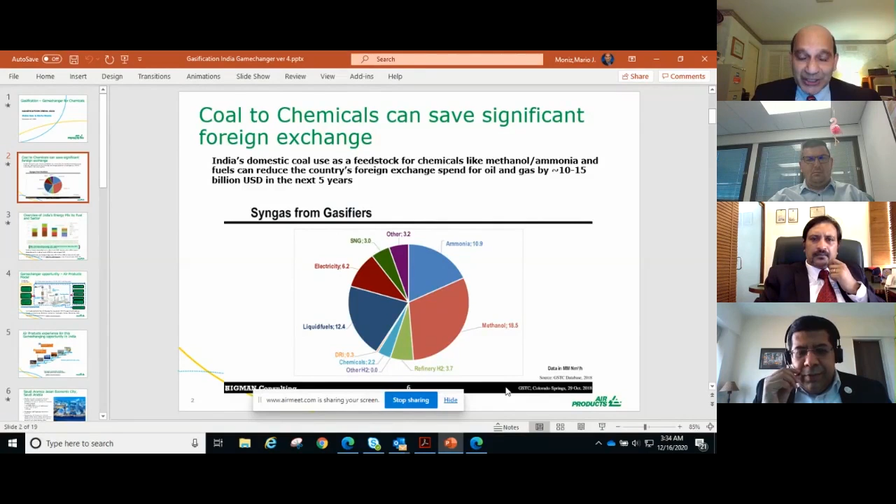Again, as we're talking, it's a game-changing opportunity for India, it's a significant opportunity. And just along the lines of what we just heard from our moderator, Anisha, the significant savings is the reduction of foreign exchange from the opportunity to use local indigenous coals from India, right?

So if we look at gasification, we take it in totality, and we look at gasification from across the world, what's been done over the past 3 decades of time. You're basically taking disadvantaged fuels, such as coal, such as maybe even petroleum resid, petroleum coke, and you have the opportunity to convert it to syngas, very clean, in a very environmentally acceptable manner.

And from the syngas, as you see on this pie chart, you can make a bunch of different chemicals, very basic chemicals like ammonia, methanol, and then onward from there, you can go on to fertilizers, olefins, fibers, petrochemicals, etc. So if you look at this pie chart, there's the potential for making a number of different chemicals in India that are today derived from oil and natural gas, which has very high imports.

And then there's also the possibility to make a different type of product slate - middle distillates, such as liquid fuels, that you see on the left-hand side of the pie chart, SNG, power, clean power. So whatever the demands may be for the local region of India.

So the opportunity, again, as Anisha mentioned, is to save foreign exchange in the range of about $10–15 billion, which is very possible in the next few years.

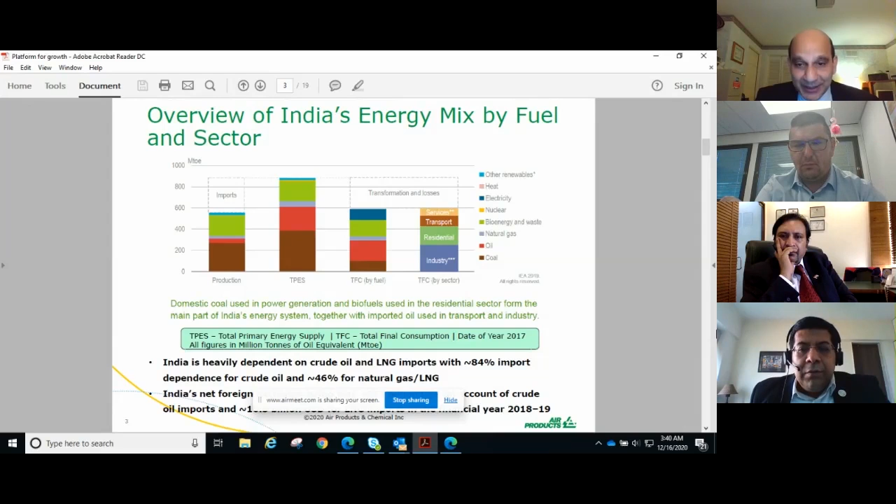So whether we look at this slide, which is both the fuel, or the prior slide where you can make basic chemicals and onwards to more advanced chemicals, that is this game-changing opportunity available to India through a very proven, well-understood, low-risk technology. So how can Air Products, how can the company that Shiba and I work for, work with you and your companies to bring this game-changing opportunity to your region and your part of the world?

So this is just a very summary slide. In fact, Shiba will cover the slide in more detail in a few minutes. So at this point, I just want to say a few words.

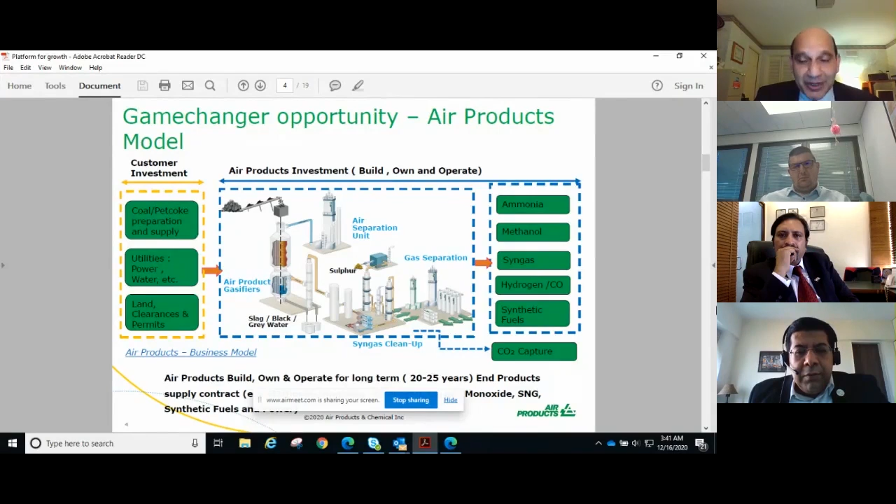So if this is the business model and this is what Air Products can bring to you, you may ask: what's your experience? What have you done in gasification? And why should I be working with you, right? It should be a very fair question. So let's speak about that right now.

So here's our short summary of the experience Air Products has had. Actually, in the past few years we've used gasification in our plants as a customer, as some of you might be or might be interested in. But only a few years ago, we actually started with acquisitions.

In 2018, we first acquired the Shell gasification technology—this is a dry feed technology, as some of you may know. And in that same year, we bought the GE gasification technology, which is very complementary to Shell; it's more a slurry-based technology for different types of coals and feedstocks. So between Shell and GE, it gives us a very broad span of taking in, honestly, any different type of coal, petroleum coke, or resid. It's a very broad range of feedstocks that we can handle.

And what these two technologies brought to Air Products is literally hundreds of gasifiers through their licensees, which are now owned by Air Products. That was a lot of experience, a lot of intellectual property, and a lot of people with this broad experience spanning about 30, 35 years of gasifiers up and running in all parts of the world.

And then we've taken this experience and we got very busy. As you can see, as we step up this ladder, we've done many build, own, and operate projects where Air Products, either on its own or through joint ventures, has invested several billion dollars. We'll go through all these different projects. As you see in the stepped ladder approach, there are 5 different projects here. In the next 5 slides, I'd like to cover these 5 different projects, and then I'll turn it over to Shiba, who will do a deeper dive on build, own, and operate.

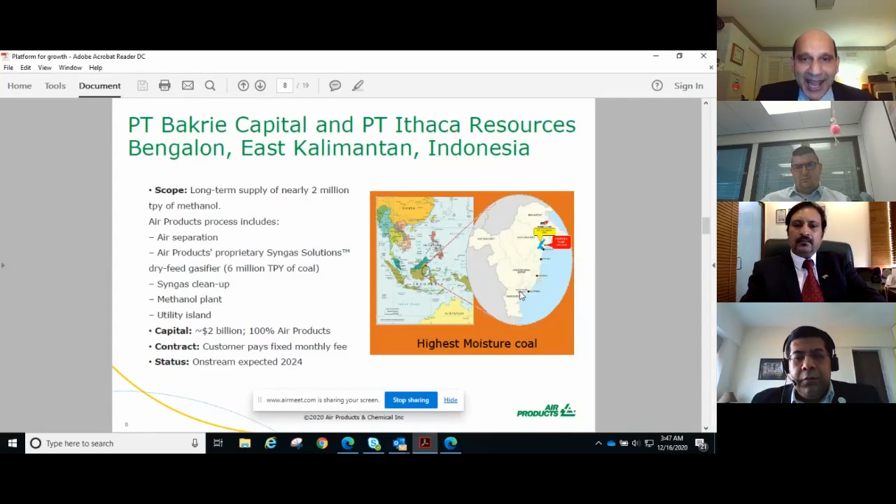Construction is going very well. We expect to be up and running within the next 2 years.

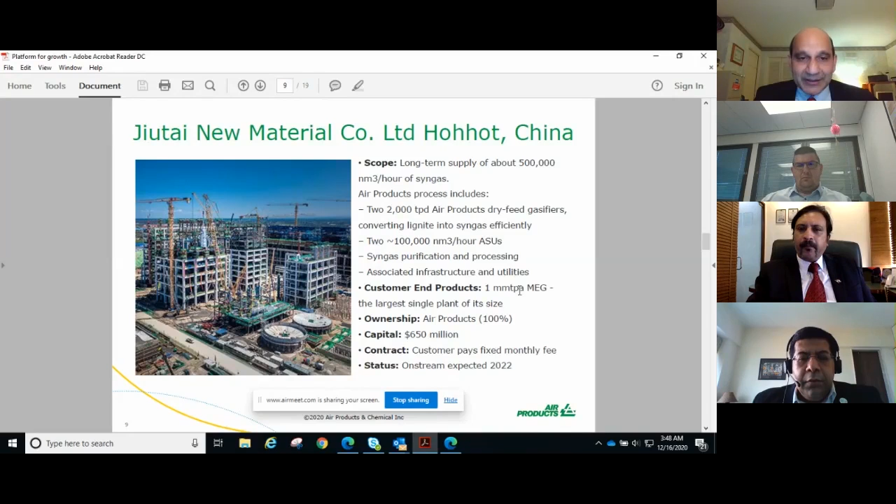And last, before I turn it over to Shiba, who will talk to you a little bit about a couple of India projects, I just want to share with you one more, smaller project. The size range we work with goes from very small to very large.

So I just want to give you a flavor. Remember the pie chart? Gasification is very versatile. The pie chart we showed earlier can be taken to many different types of chemicals, methanol, ammonia, and onwards, also distillates and IGCC such as power. Those were some of the examples I shared with you.

So now I'd like to turn it to Shiba. I'll move to the next slide, and Shiba will take you through a couple of projects in India and then a deeper dive into our build, own, and operate model.

Thank you, Mario, for a very nice presentation, and for passing on to me for the next couple of slides. Good afternoon to all of you present here. I will first take you through some of the projects we are currently executing and will perhaps be executing in the near future, which are very large gasification projects coming up in India.

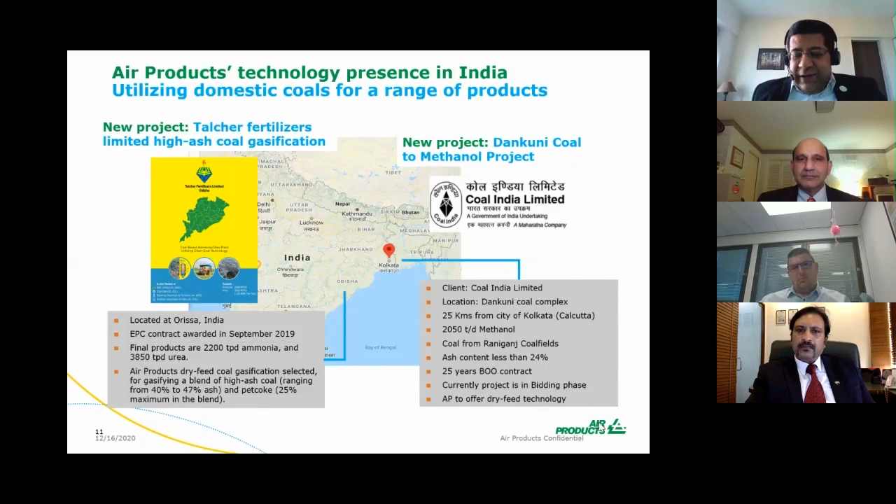Okay, so I'll just keep that.

Coming to a very important aspect, as Mario mentioned earlier, the contracting philosophy in India in the past had been conventional EPC, where the customer or client used to select the technology licensor, and they would then either implement the project themselves or select an EPC contractor to build the plant. We typically call this a sale of equipment model, or SOE.

In that case, the customer is investing in the entire capital expenditure, and the customer is taking all the risk in terms of technology risk, construction risk, and operations and maintenance risk throughout the lifetime of the project.

Now, what happens in the build and operate model is companies like Air Products are in a position to finance these multi-billion-dollar projects in India and elsewhere in the world, as Mario has explained in some of those examples, where we bring our own capital and our own in-house technology, build the plant in a certain time frame, then commission, own and operate the plant, and enter into a long-term agreement with the customer for product offtake. The product could be syngas, or it could be other chemicals like methanol or ammonia, or other products, as Mario explained in the pie chart.

So this is what we call the BOO supplier or BOO operator — Air Products will be providing the entire capital to design and build the plant, and then we will own and operate the plant for a long term, typically 20 to 25 years, and enter into a long-term agreement for product offtake.

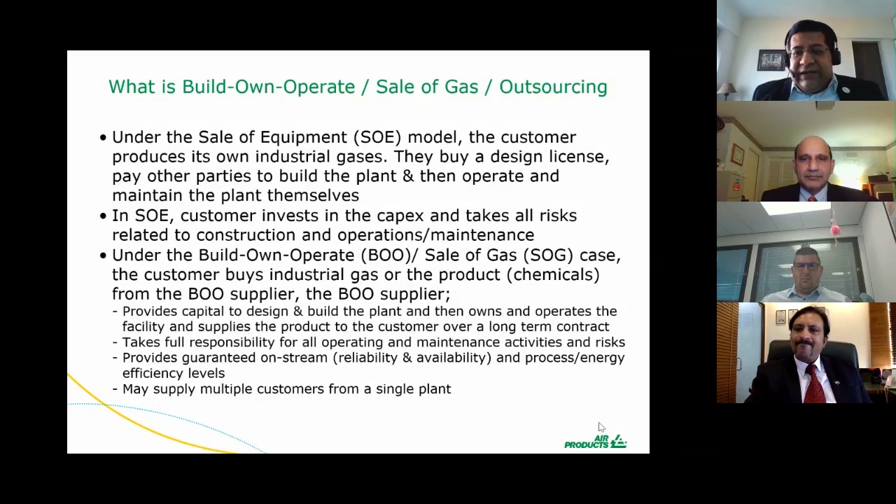We may also be able to supply multiple customers from a single plant, so economies of scale come into the picture. In a cluster situation with multiple customers, we build a bigger scale plant and supply two or three customers from it, enhancing the economies of scale.

This particular slide Mario has already explained to some extent, but I wanted to do a deeper dive into how we offer this build-own-operate, or as we call it, sale of gas model, to our customers worldwide, and what benefits it brings to the end user or customer.

As Mario already explained, there are multiple opportunities in terms of products we can look at, like ammonia, methanol, syngas, hydrogen and carbon monoxide, and also synthetic fuels like CTL — coal to liquid — or even SNG, synthetic natural gas.

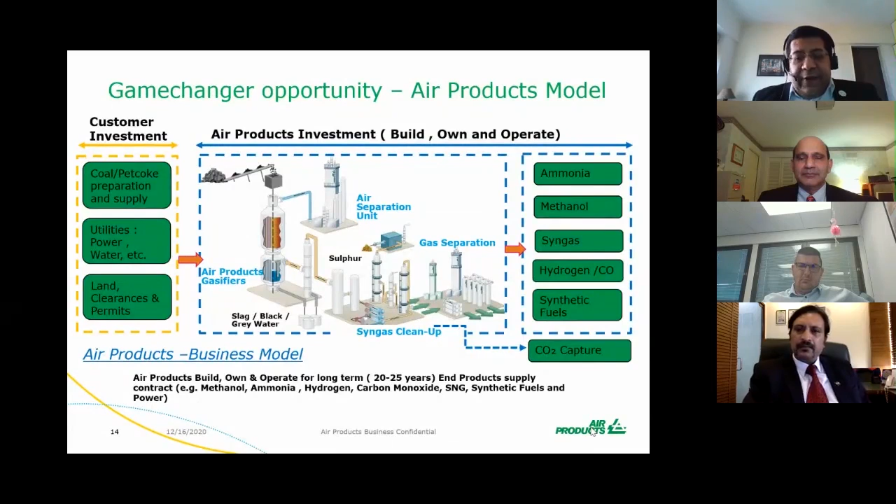Here, the business model is Air Products will build, own, and operate for a long term, 20-25 years, and the end products will be supplied to the end customer based on certain long-term guarantees, as I've mentioned. Coming to the next slide, this is a very simple slide, but I want to explain how the risk matrix changes.

And even the costs could also vary in terms of implementation cost, typically by the end of the project there could be cost escalations because of various reasons.

So what we do is we take over all that risk from the customer or the end user, and we bring in the capital, we build the plant and own and operate it, and we give all kinds of long-term efficiency and availability guarantees. We also give a very predictable cost structure, in the sense that when we sign the agreement upfront with the customer, the cost structure is already known, how much customer has to pay every month in terms of a conversion charge.

So there is no surprise at the end of the day that the cost would go up for the customer. It's a very predictable cost structure for the entire 25 year period.

At the same time, we also guarantee the startup date, that is the project schedule. We will have to ensure that the project is done on time, commissioned, and started up on time. Otherwise, there will be penalties also in the contract if we are not able to reach those guarantees.

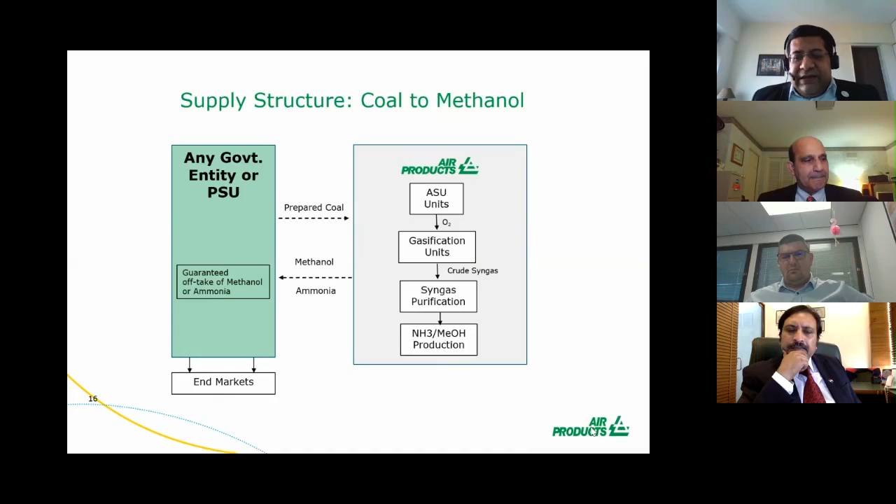What we need is prepared coal or pet coke as a feedstock. And only one thing is very important: the customer has to take care of the end market, which means they will have to take care of the final marketing of the product. We are basically giving a long-term guarantee as a BOO operator, including the investment part.

So what are the benefits of the BOO model, as we say in India, build, own, operate? Air Products will invest, own and operate, and we will guarantee the plant performance backed by significant financial incentives, as I've mentioned. There will be even penalties if we are not able to achieve those targets in the contract.

So there will be complete capital avoidance by the customer or client, which means Air Products will invest the capital. It's a $2 billion project. The entire $2 billion Air Products is going to bring.

And we will guarantee the availability, that is the percentage on-stream factor. We will guarantee the reliability of the plant efficiency in terms of the energy efficiency, that is the specific consumptions. We will also guarantee the product specification, the operational cost, and also guarantee the build schedule and the cost of putting up the plant, which is basically the construction cost and the schedule cost.

So these are the benefits of the build and operate model, and this is a game changer, as we are saying, in terms of accelerating the process of putting up more coal gasification projects. Because what is happening is customers may be hesitating about whether this technology would work, whether they'll be able to generate that much fund, whether there is an inherent risk in the project, or even whether the project is viable or not. So there are several questions that come up and typically delay the whole decision making process. So here we can swiftly move in as a BOO operator.

We can take away all those risks and give long-term guarantees, operating these plants smoothly over time. Mario has already shown how we are operating the Luan plant, which has been running for the last 3 years, already achieving full capacity and a very high availability factor. We've demonstrated worldwide our capability in operational excellence, in bringing in the capex of multi-billion-dollar projects, and our own strength as a licensor with engineering capability to build such complex gasification projects.

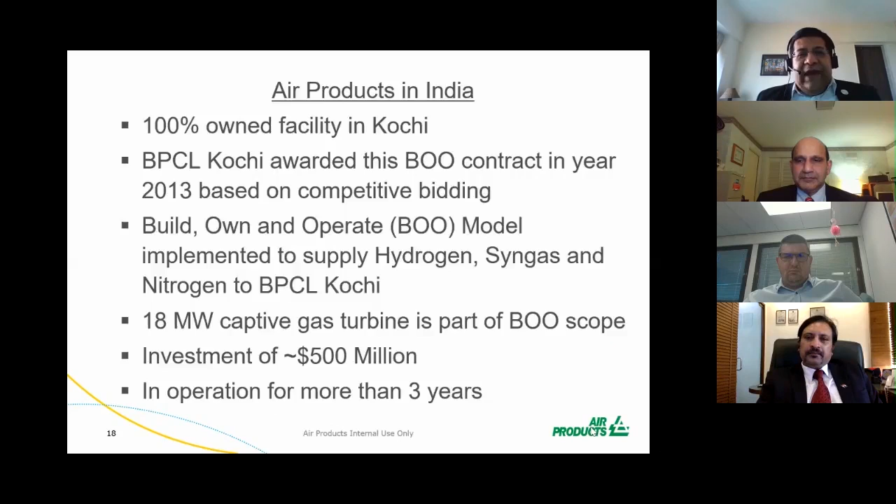We have a very large build and operate facility in Kochi. You can see the photograph here. This was a long-term 15-year agreement, build and operate, signed with BPCL for supply of hydrogen, nitrogen, and syngas. We also operate a captive power plant, a gas turbine, as part of this BOO facility. About $500 million worth of investment has been made by Air Products, and we are on a 24/7 basis supplying hydrogen, nitrogen, oxygen, and other products. We will also soon be starting up our syngas plant, which will supply syngas to the oxo alcohol and acrylate project, the downstream petrochemical unit of BPCL Kochi.

So that was my presentation on our overall offering. As Mario has already explained, our international strengths in terms of what we are doing globally, I've tried to give you a flavor of what our business model is all about. Our BPCL investment is very large and already operational. You are all welcome to see the BPCL plant anytime—you can approach us and we can take you there to see how it's working. Thank you very much for this opportunity.

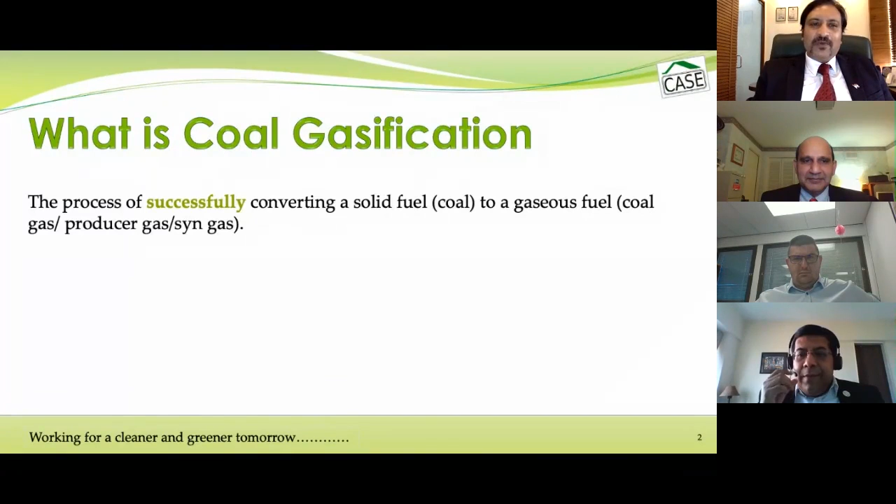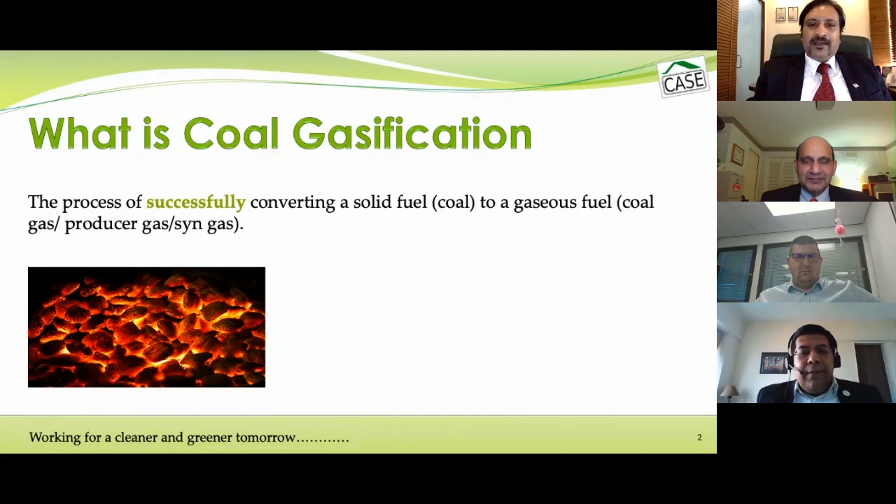Okay, wonderful. So I have a couple of notes I would like to go through. Firstly, we would like to talk about what coal gasification is. In basic terms, we define it as the process of successfully converting a solid fuel, in this case coal, into a gaseous fuel, which could be coal gas, producer gas, or syngas. It sounds very simple, but a lot of technology goes into it.

What are the various gasification technologies available today? Coal gasification has a huge history, and as of now, the following technologies are prevalent in the industry: fixed bed coal gasification, circulating fluidized bed coal gasification, entrained flow gasification, and finally UCG coal gasification, which was talked about in the first session. There was always one gentleman from Ergo who used to present on this, Dr. Blinderman—I remember him. Unfortunately he is not available today to discuss this, so I think someone will take this up in the future.

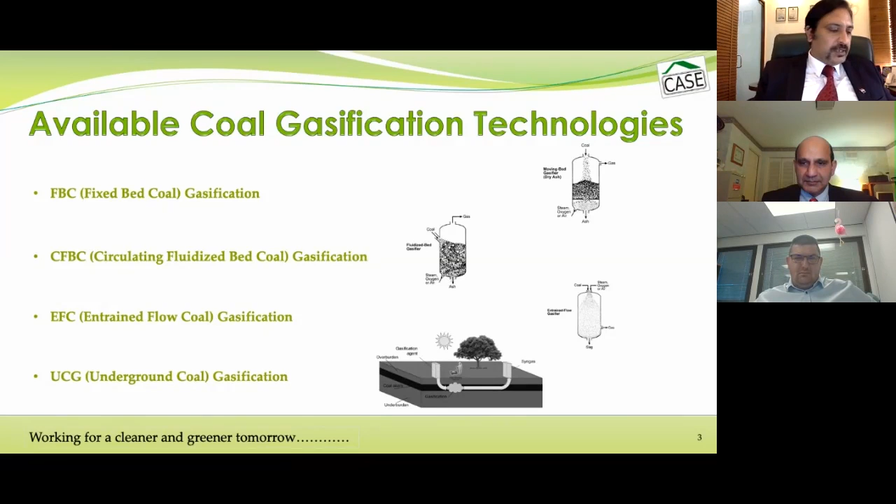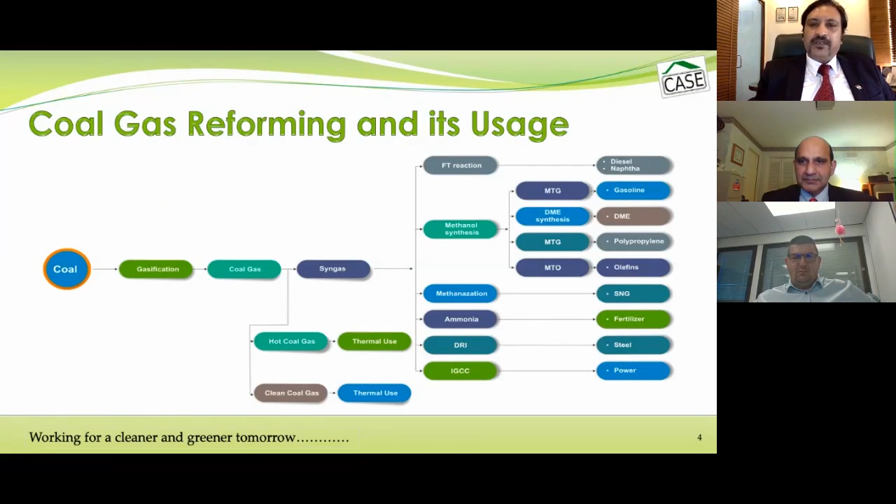Once the gas has been formed, it can be used in a number of ways. This is a value chain: coal is converted to gas through the gasification process, and there are two primary uses of this gas. One is the thermal usage, and the other is to convert it into syngas for different applications like liquid oils, synthetic natural gas, fertilizers, steel, power, etc.

Where do we pitch in this value chain? We as gasifier people basically play with the coal gas and use it as the heating or thermal use of this gas. So I would like to explain the technologies which we are using here for this.

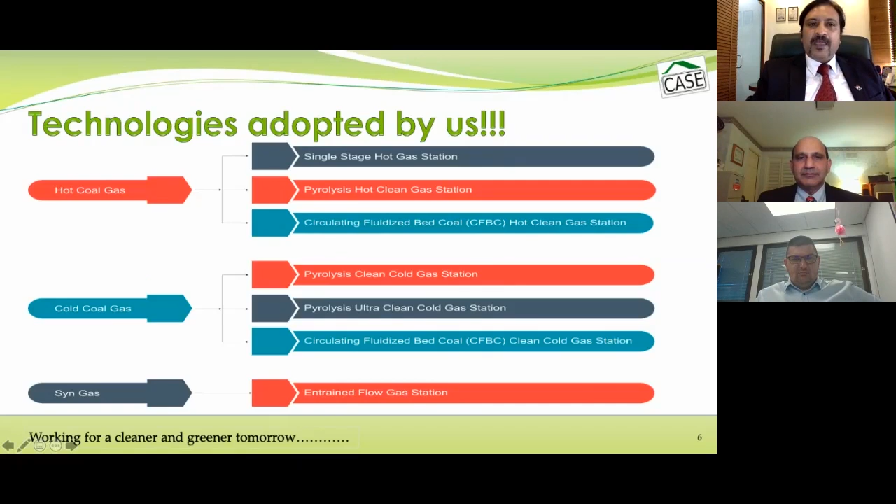Depending on the physical properties of gas, and more importantly, the gas temperature at the gasifier exit, we have categorized our technologies accordingly. First is hot coal gas, with variants like the single stage hot gas station, the pyrolysis hot gas clean gas station, and the circulating fluidized bed hot clean gas station. In the category of cold coal gas, we have the pyrolysis clean cold gas station, the pyrolysis ultra clean cold gas station, and the circulating fluidized bed clean cold gas station.

As for syngas, we have recently tied up with KEDA, who are the pioneers of this gasification technology in China. So we are doing entrained flow gasifiers with them for this.

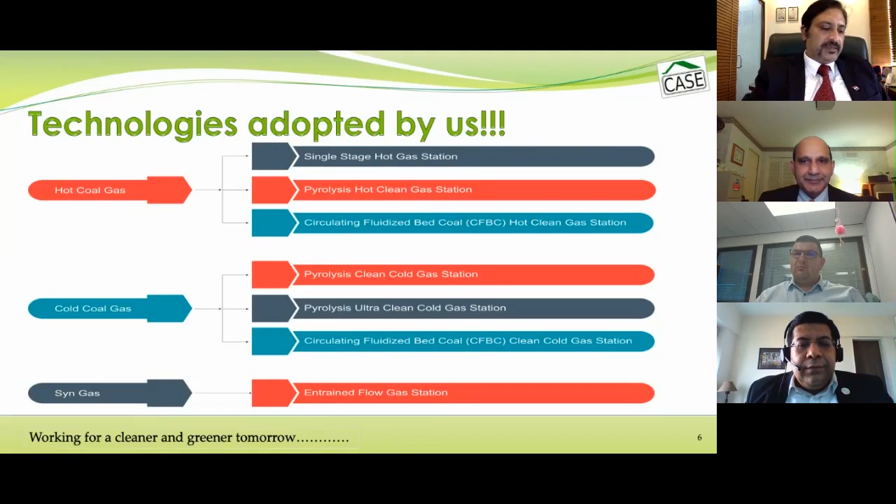My next important section for gasification is that whenever we talk about coal or gasification, there is always doubt in the mind about whether this technology is clean, whether it will be okay for the environment, what issues can happen because of gasification, and how harmful it would be. So I've categorized all these into four basic categories related to air, water, noise, and ground.

For air-related issues, we would say dust content in gas results in higher SPM and RSPM levels, sulfur content accounts for higher SOx levels, higher N2 content results in higher NOx levels, and there's the poisonous nature of CO, the main constituent of gas, which can be fatal. Then whenever using coal, there's generation of coal dust, and the smell or odor of gas is also a main concern. These are the air-related concerns picked up by environmental authorities in India.

Second is water-related issues. With gasification, there's always generation of tar and light tar oils. Phenol and condensate water is also a byproduct. Then cooling tower blowdown - whenever using a coal gas system, you need a cooling tower where water evaporates, and you need to blow down water to maintain TDS levels. And then you have water seals - a number of them in coal gasification systems which need replenishment and overflow at times. So what do we do with that?

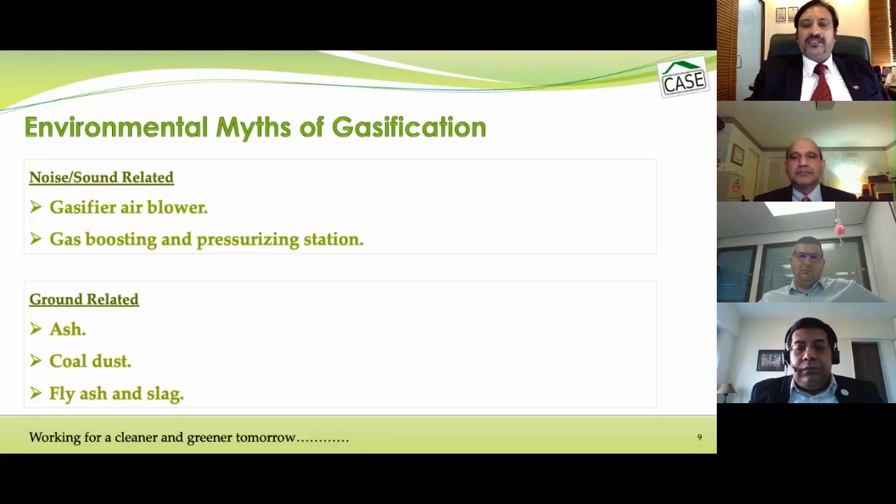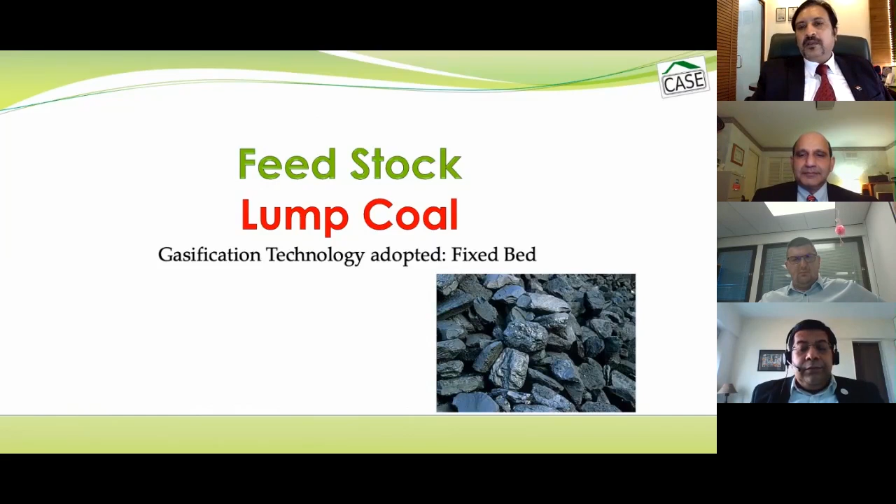So our technology is primarily divided into two parts depending on the feedstock. The first variant of our gasifier, in which we use sized coal, would be the single stage hot gas station.

This is a very simple design gasifier in which coal is fed from the top. The air and steam, which are the gasifying agents, are injected from the bottom. The gas is generated, passed through a water seal, and then through cyclone separators, and then taken for utility. The best thing about this gasifier is that the gas outlet temperatures are more than 450 degrees.

Because of this factor, we have played with the physical properties of tar and of water. We know that below 350 degrees, tar starts condensing into liquid, and below 80 degrees, it starts solidifying.

We all know that water always stays in moisture or vapor state above 100 degrees. In this technology, we take gas at 450 degrees, making sure all the tar and volatiles stay in gaseous form. The condensate water or phenols remain in vapor state and crack into carbon dioxide and H2O at the point of utility, which is the burner or point of usage. These are fully sealed designs, eliminating any chance of gas dispersion into the atmosphere, so there is no gas leakage in this kind of system.

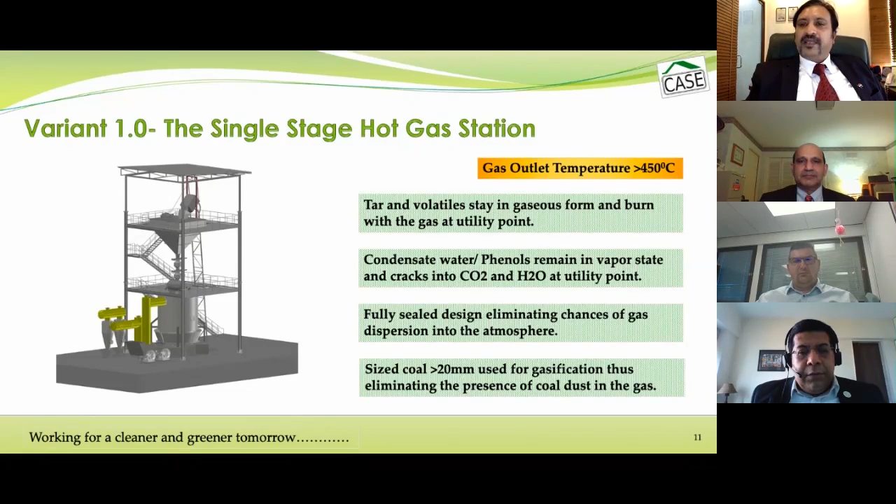So this is a simple process design. This is the gasifier, with the air blower, and then the gas is generated. Air and steam are injected from the bottom. It passes through a water seal, which is basically an isolator too. When you want to cut off the gasifier from the main system, you raise the water levels, and then the gasifier is isolated from the utility point.

There is a small cyclone dust separator here, which takes care of the heavy dust content in the gas.

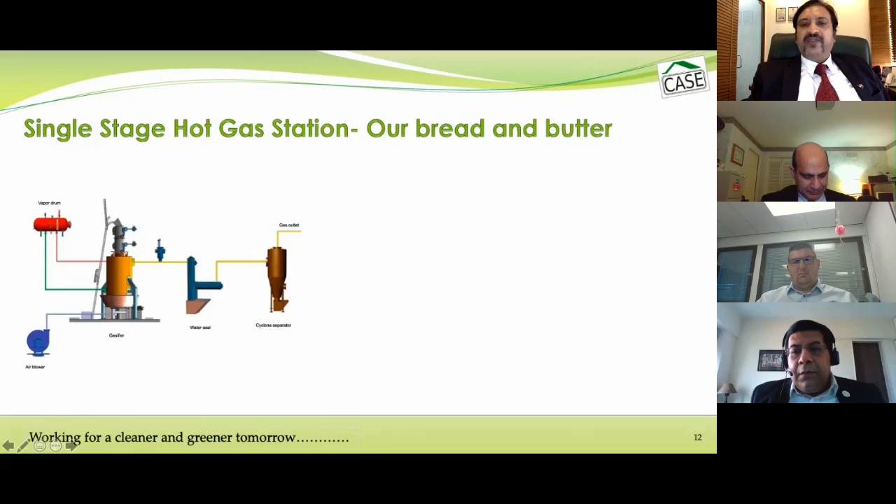One of the best features of this gasifier is that it has the highest gas calorific values, which can touch up to 1800 kcal per nm cube. This is because it's a combination of the calorific values of coal gas, the volatiles present, and also the gas sensible heat we are generating. The gas temperature is around 450 degrees, so we get the sensible heat of the gas at the utility point.

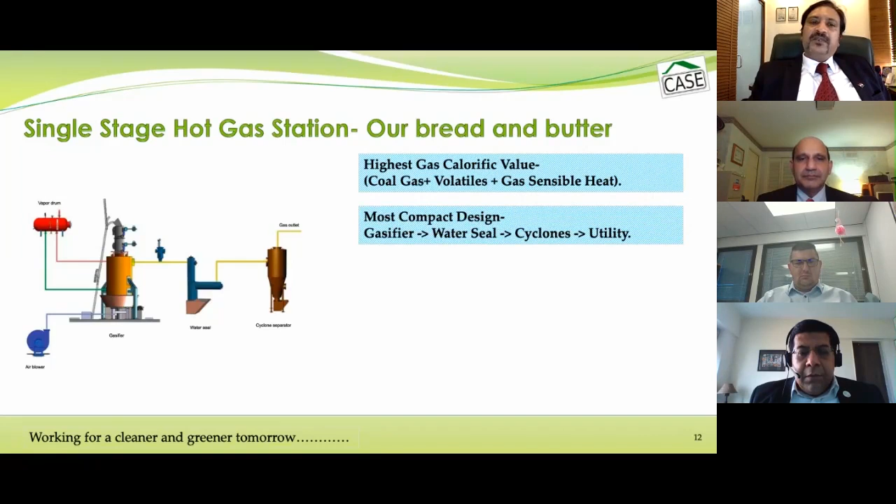It's a most compact design, as you can see from the process flow, very simple: there's a gasifier, water seal, cyclone, and utility. Nothing much happening beyond that.

High calorimetric temperatures, depending on air recuperation efficiency, allow this gas to reach furnace heating temperatures up to 1600 degrees. We have tried this gas for very high temperatures where glass melting is the application, which requires temperatures around 1500 degrees plus. These gasifiers are very effective there.

Also for insulator heat treatments, where you require temperatures around 1380 degrees, these processes need a reducing atmosphere, so these gasifiers are very effective there as well.

Another important aspect of this gasifier is that it's quick to start and stop. You can turn it on in less than a minute, ramping up from 10% to 100% within a minute. These are very quick, small gasifiers for small applications, primarily used for the thermal use of gas.

Then a second variant is the pyrolysis hot gas station. Here the gas temperature is 150 degrees. We call it hot because it's above 50 degrees; anything below 50, we call it a cold gas system. This is like a single stage gasifier, but the height is almost double that of a single stage, with an addition of a pyrolysis section.

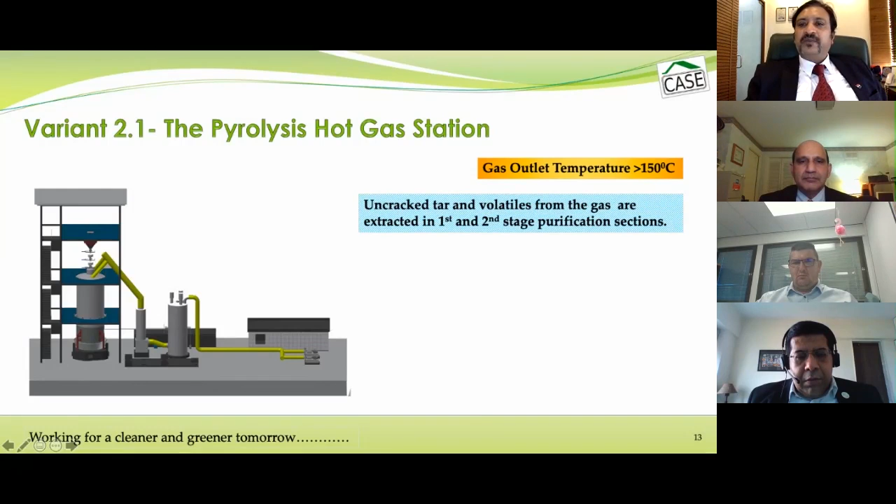An important feature is that uncracked tar and volatiles from the gas are extracted in the first and second stage purifying sections, the tar washing tower and electrostatic tar precipitator. The condensate water and phenols remain in vapor state, since the temperature is always above 150 degrees, and they are cracked at the utility point, at the burner, wherever the gas is used.

These are again fully sealed designs, eliminating any chance of gas dispersion into the atmosphere. For these gasifiers also, we use sized coal more than 20 mm, eliminating the presence of coal dust in the gasification process.

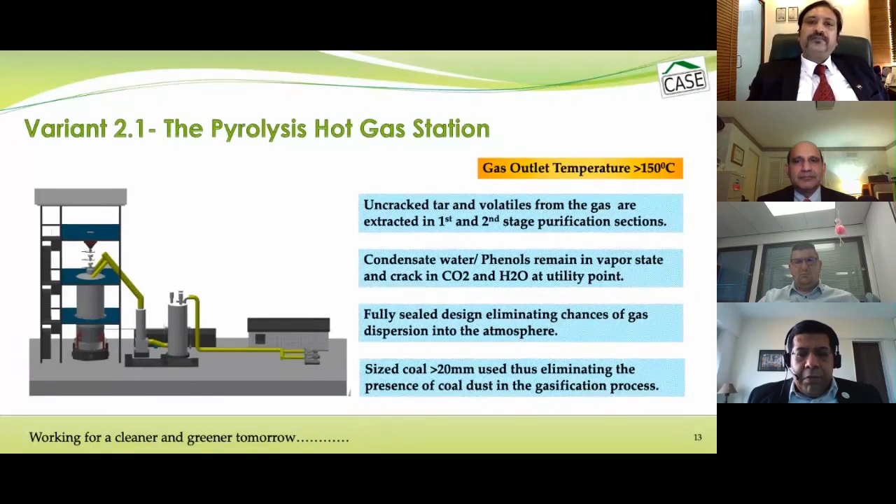The third variant for this sub-variant of the pyrolysis gasifier is the pyrolysis cold clean gas station. In this process, we add an indirect cooler to the already explained pyrolysis process. The purpose of the indirect cooler is to remove the moisture content of the gas. Here we call it cold gas, as the temperature is reduced to less than 50 degrees, essentially ambient temperature.

The whole process is the same as the previous slide, with the addition of an indirect cooler where the gas is cooled and reduced to 50 degrees. Because of this, a third purifying system is incorporated, which is the indirect cooler. Then a condensate water treatment system is added, since we take out the condensate water from the gas, we need a complete treatment process for this.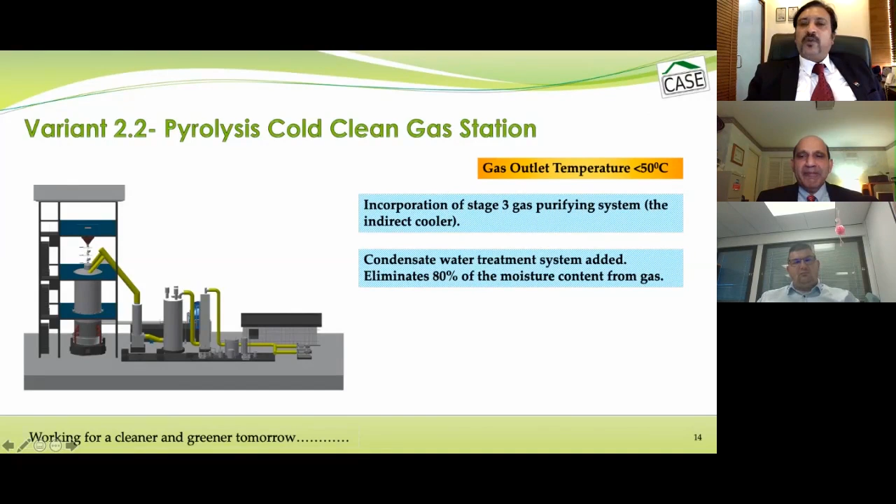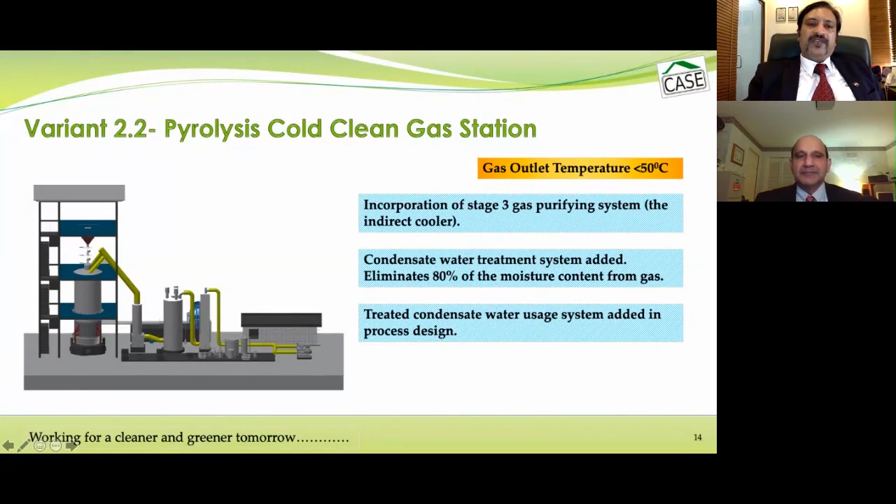We have incorporated a condensate water treatment system, eliminating 80% of the moisture content from the gas. Then a treated condensate water usage system is added, because we treat this condensate water and reuse it 100% in the gasification process. As we know, we require steam for gasification, so we take the condensate water into our gasifier jacket, convert it into steam, and put it back into the gasification process.

This is very important, how we are able to treat the condensate water. This is our main technology. We are playing with the physical characteristics of the two most important impurities of this gas: the condensate or phenol water that comes out from the system, and the tar and oils that are generated.

If you look at the parameters of the gas, the temperature at the exit of the gasifier is maintained around 120 to 150 degrees. In this condition, most of the tar is extracted from the gas in the tar washing tower and electrostatic tar collector. Because of this property, the tar liquifies, and we take it into an underground tank and reuse it in our system.

Beyond this point, we take the gas and pass it through an indirect cooler, reducing the temperature, and thus condense the moisture from the gas. In the first two phases, we take out the tar from the gas, and in the third stage of purification, we take the moisture out. So we are removing the tar and moisture at different stages of the gasification purifying systems. This is how we are able to do this.

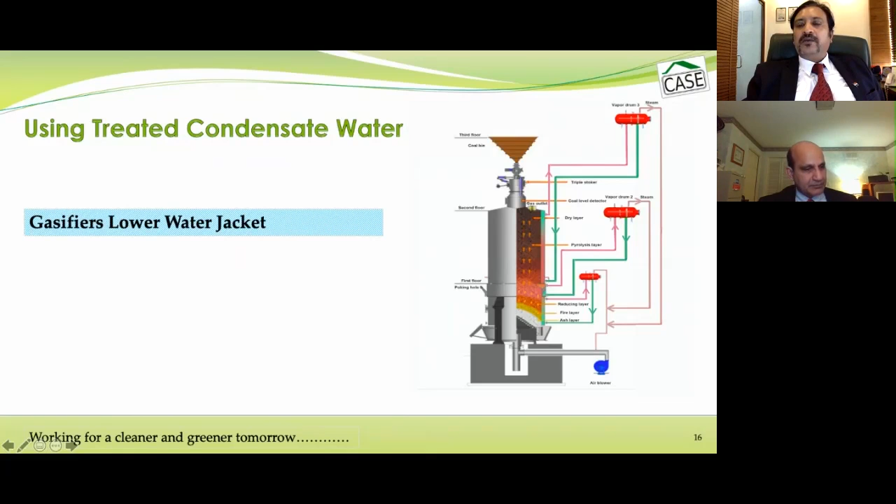Once we take out the condensate from the water, we need to reuse it back into our system. Our gasifier has three shells: the lower shell, the middle shell, and the upper shell. We use this treated condensate water in the lower and middle shells, where we have attached vapor drums, by which the treated condensate water is converted into steam through heat transfer in the gasification shell.

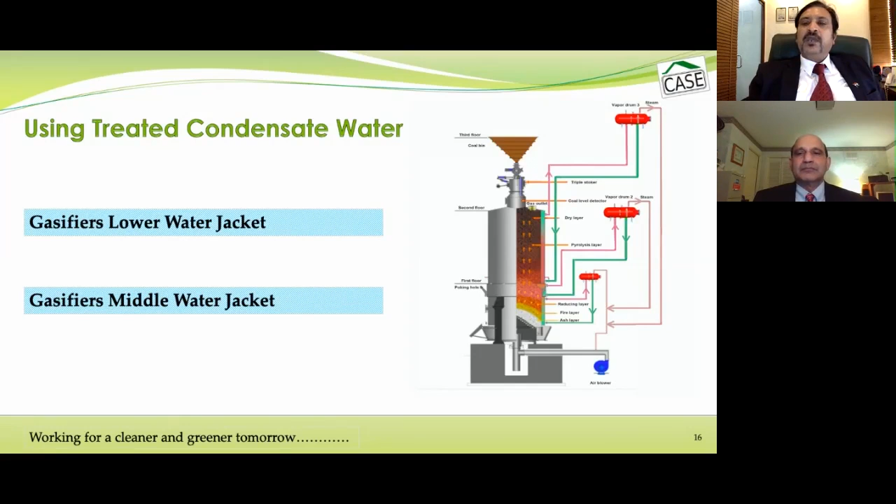This steam which is generated is pumped back into the system as a gasifying agent along with the air. So the gasifier's lower water jacket and middle water jacket both use the treated condensate water. This is how we are 100% consuming this condensate water, and we are not disposing any of it into the drain or throwing it off as an effluent.

Then we have another variant for the pyrolysis called the ultra clean gas station. We have added another ESP, or electrostatic precipitator, to it. Some applications require very pure gas, something like less than 30 ppm of tar and dust. So for this, we have come up with this process, adding a fourth stage purifying system, the electrostatic precipitator.

This also reduces volatile and dust levels in the gas to less than 30 ppm, making the gas relatively cleaner for applications such as the food industry, where you have things like biscuits being produced. So this is more prevalent there.

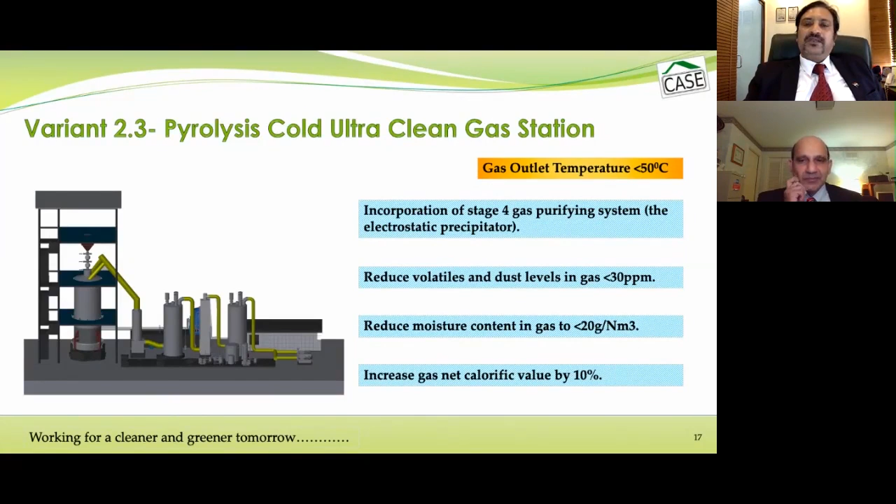Then we reduce moisture content to less than 20 grams. In turn, we increase the net calorific value of this gas by 10% by extracting the moisture and reducing the dust levels. Why do we call this gasifier to have an edge over other gasification technologies?

It's because of the consistent gas quality which comes from it at all times. We have observed that using this technology on different coals, we have been able to generate the same calorific value of gas at all times. It is basically independent of the quality of coal that we use. We are able to get the same CV of the gas.

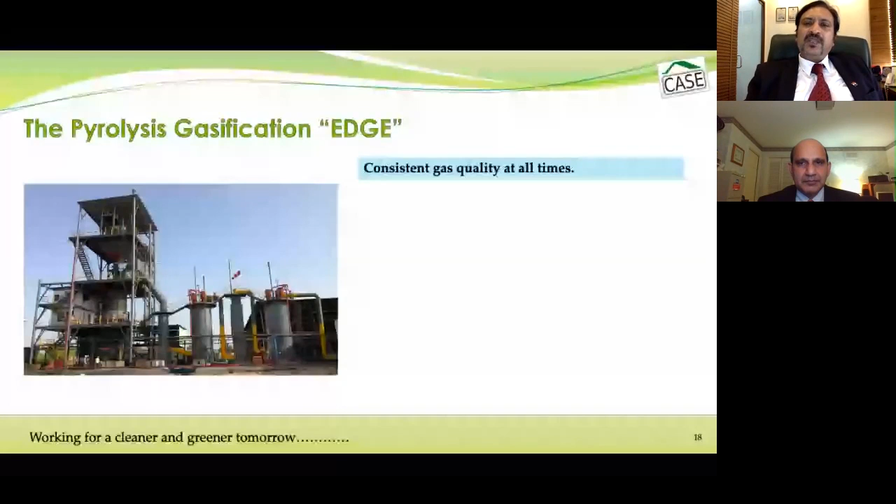Secondly, there is less fluctuation in this gasifier. Since this is a single line process, all the equipments are in series, so there is very less fluctuation in pressure, whereas other gasification technologies use two-stage gasification, where you have one gas coming from the top, one gas from the bottom, and then you're mixing the gas. You have different purifying equipments for the top gas and for the lower gas, and then you're mixing it, so there are a lot of pressure variations in that.

But since this is a very simple, single flow design, there are less pressure fluctuations. This is a fully automatic PLC controlled system, requiring very less manpower, only for sitting at the DCS and operating these gasifiers.

A very important part of this is these are refractory-less, non-clogging gasifiers. When we initiated these gasifiers in India, the top section used to be refractory lined, but over a period of time we saw that the inside of the refractory used to get choked up. So we came up with this technology by understanding the complete thermal heat transfers, and converted the top section of the gasifier also to a water jacket. This helped us overcome the clogging problem we were having in our previous gasifiers. This is one research and development we did for this technology.

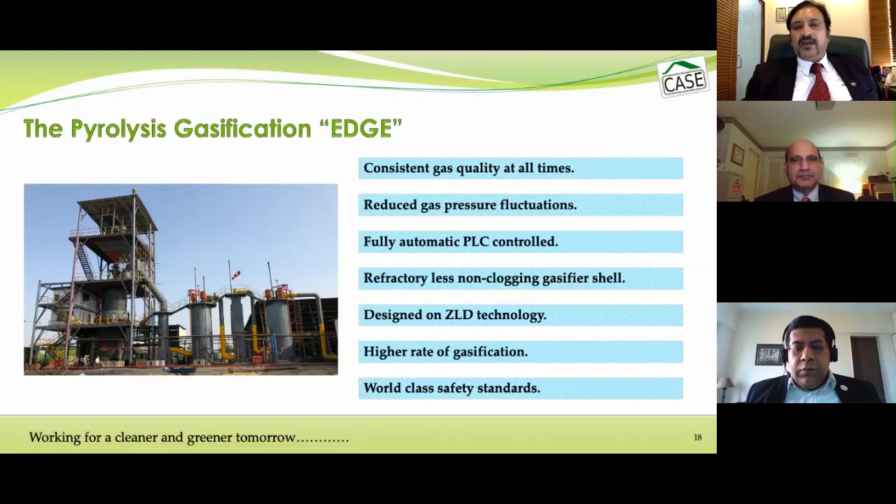So what I'm trying to say is that if you go in for a different technology, you will probably require double the number of gasifiers compared to what this technology can offer. We have also incorporated world-class safety standards for this, since we're talking about gas, which is anyway a very dangerous commodity. We need to make sure world-class standards are met, not only in the process but also in the usage of gas.

Now we move on to our next gasification technology, in which we use coal fines. For this, we have recently collaborated with CADA, the pioneers of CFBC technology in China. They are the giants of this technology, with reference to roughly around 80 to 82 running projects. We feel India is now ready for this technology because the availability of sized coal is reducing, and we need technologies that can use coal fines for gasifying. So that's how we got in touch with them, and we have a joint technical collaboration with them, and we are introducing this technology in India now.

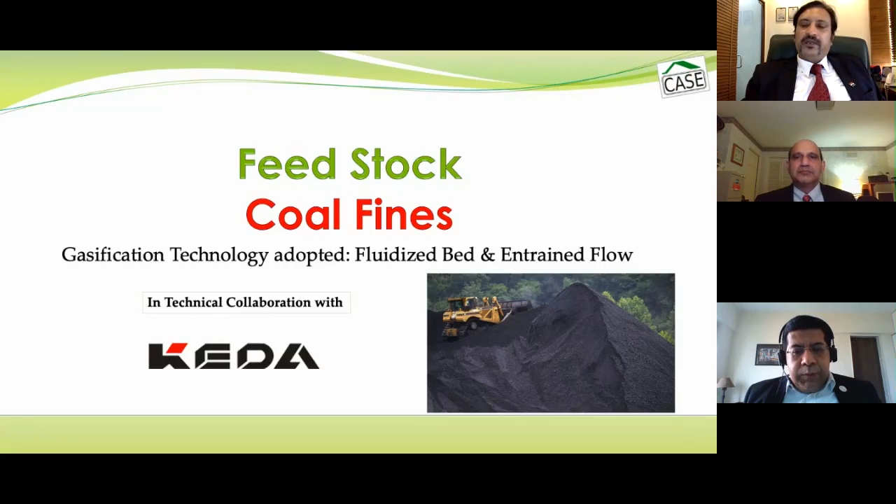This is the CFBC hot clean gas station, and this is the process flow for that. Gas temperatures are above 150 degrees for this technology, that's why it's called hot clean gas. The gasification temperatures range from 950 to 1000 degrees centigrade, that is the reaction temperature inside the gasifier.

This is the gasifier. The pressures are designed at 20 to 30 kPa, and the gasifying agent, which happens to be air here, is injected at the bottom of this gasifier. The temperature here is kept around 700 to 750.

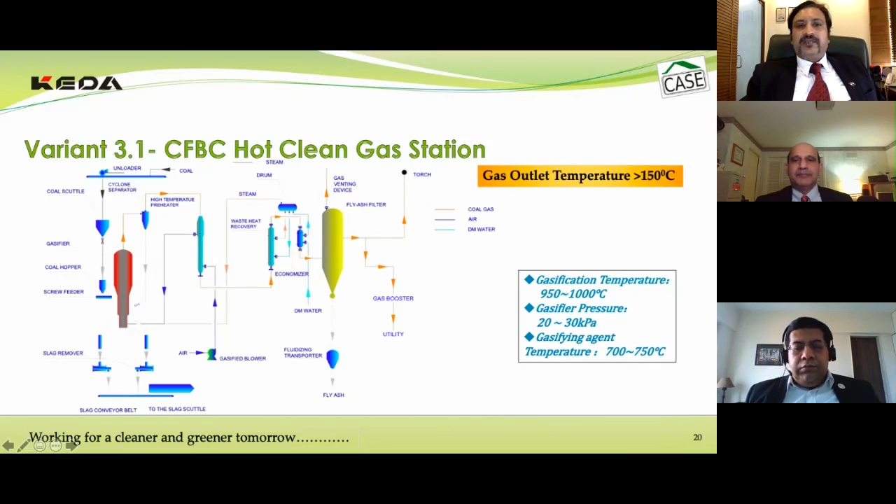This is a very simple design. It's a single line process in which coal comes in, injected at the lower end of the gasifier. Air and steam, the gasifying agents, are injected from the bottom, creating a circulating fluidized bed system, and then the gas is generated.

Oxidation reduction reactions take place, and then this gas is passed through a cyclone separator. Any heavy particles in the gas are recycled back into the gasifier for further processing. The size of coal required is less than 10 mm, and the gas coming out is around 900 degrees.

This gas enters a heat exchanger, which we call HE1. It's also a recuperator for the combustion gasification air, which we use as a gasifying agent. We blow air into the heat exchanger—this is an indirect heat exchanger. The gas comes in at 950 degrees, and the air, which is ambient, gets heated up and is then injected into the gasifier at the bottom. So we are utilizing the entire sensible heat of this gas.

Further, this gas goes into a secondary heat exchanger, a water-cooled heat exchanger, where we are making steam out of this. Again, an indirect heat exchanger.

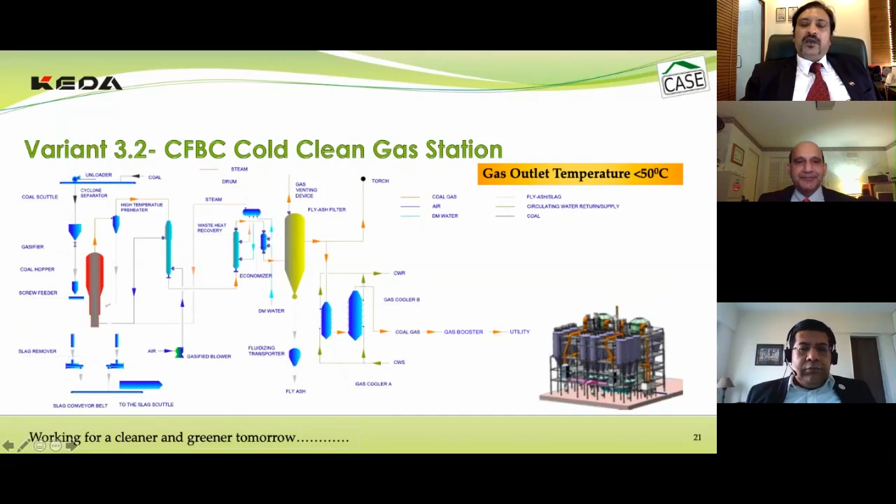The next variant for this gasifier is the CFBC cold clean gas station. Similar to what we saw previously, here we have introduced two water-cooled heat exchangers in which we are reducing the gas temperature from 180 degrees to ambient temperature.

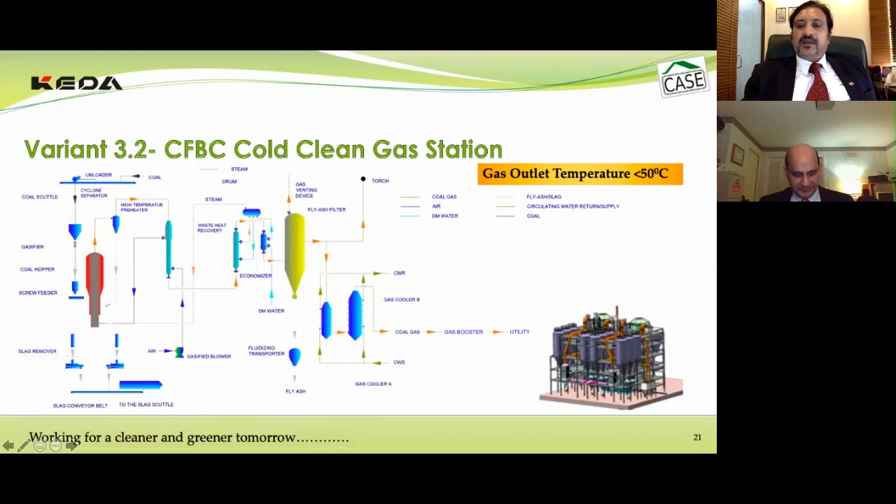This is the 3D view of this gasifier. The technology features: number one, you are able to 100% substitute high-cost fuels. You're able to substitute heating oils like HFO, LSHS, LDO, SKO, natural gas, propane, LNG—100% substitution for thermal applications.

Low-cost, readily available coal fines can be used in this technology. As I told you, fixed bed has a limitation now, as the availability of sized coal is becoming difficult. So this technology is the future for gasification in India for thermal application—here you are able to use low-cost available fines.

These are fully automatic, zero manual intervention gasification stations. We visited a few KEDA installations in China and were surprised to see no one at the gas station—only a few people sitting at the DCS—and the system running 100% on auto mode. The beauty of the system is that there is a one-stop button system for this.

If there is any problem in the utility of gas, or any problem at the gas station, you just need to press one button and everything will sequentially close down. It would be the safest gasifier practice we have seen till date.

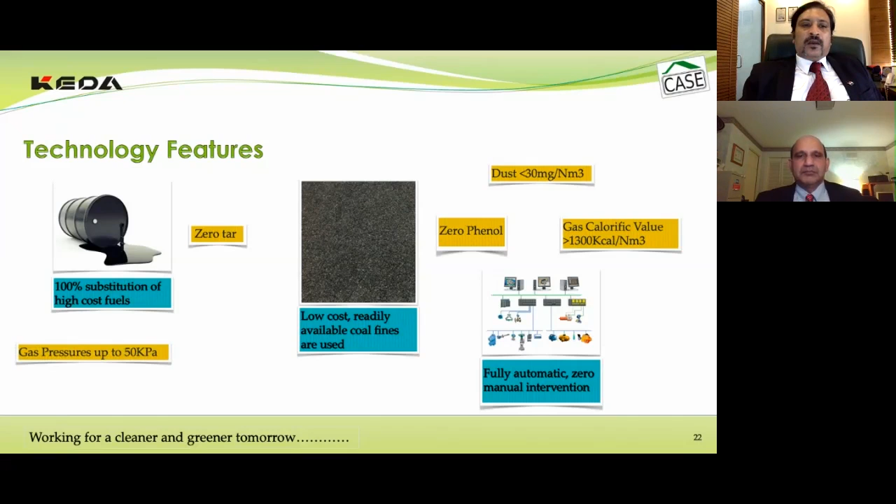Gas pressures up to 50 kPa—depending on the pressure required at the burner level or utility, we can provide gas pressures up to 50 kPa at the utility points. These gasifiers come in different capacities, varying from 10 to 60,000 meter cube. The latest one coming up is an 80,000 meter cube, which I have not put in here because it's yet to be commissioned and initiated.

Then we have one low pressure entrained flow gasifier station. This is the process flow for this. The primary reason for setting up this low pressure gasifier is that the fly ash or slag that comes out from the CFBC gasifier is fine, and it could be the raw material for this kind of gasifier. So this is the only reason why we would want to push this gasifier into the industry, for the usage of fly ash coming out from the CFBC gasifier.

How are we able to comply with environmental norms? As I told you, all our gasifiers are designed on ZLD, zero liquid discharge technology. We do not incinerate, we do not recycle. There are technologies in which the tar and the condensate water that comes out from the gas come in a mixed state, so it's very difficult to separate the tar from the condensate water, and you have no option but to incinerate it. But in our technology there is nothing like that. We take condensate water at a different stage, and we extract tar at a different stage of the gasification process.

So we do not incinerate at all. Dust, tars, and volatiles in the final gas are kept below 50 ppm and 30 ppm at utility stack points. Again, we do not put a dent into the atmosphere as compared to using furnace oil or any other fuels. This technology results in lesser emissions compared to the use of any other alternate fuel.

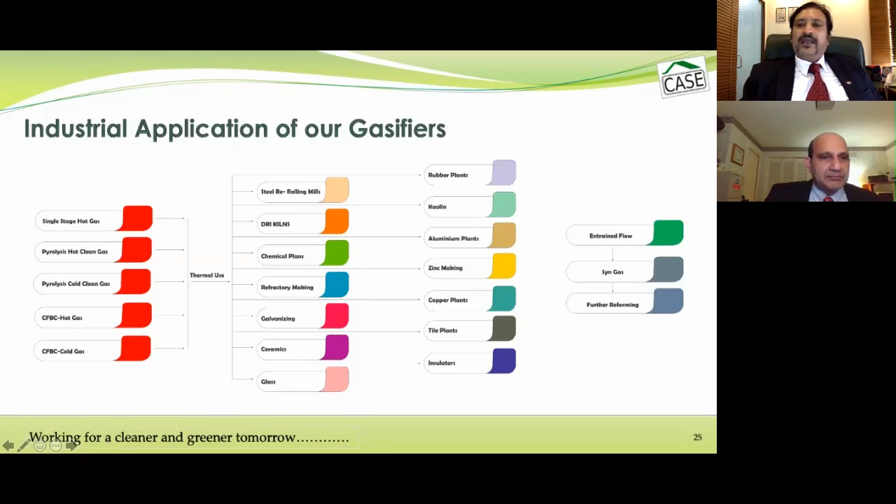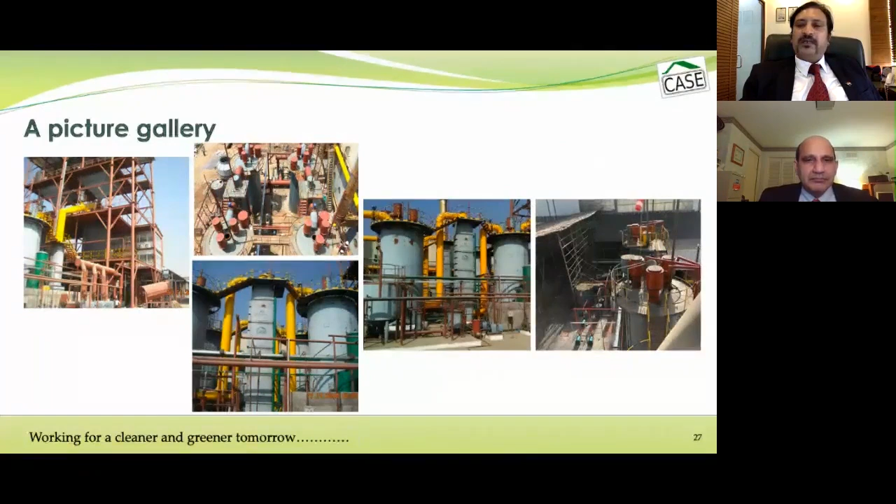These are a few pictures of our gasifiers. These are our single-stage hot gas stations. These are our pyrolysis clean gasifiers, both hot as well as cold gas stations. These are our CFBC gasifiers installed for different applications, primarily set up for the aluminium industry as well as the steel industry.

We are moving towards an Atmanirbhar Bharat. How are we doing that? We are very pleased to inform you that all the fixed bed gasifiers, all variants, are manufactured by us in India. 100% of equipment is manufactured and supplied from India itself. For the fluidized bed gasifier, 80% of project supply is from India; only critical and proprietary parts are being imported. So we are complying with our Honorable Prime Minister's vision of Make in India and making India an Atmanirbhar Bharat.

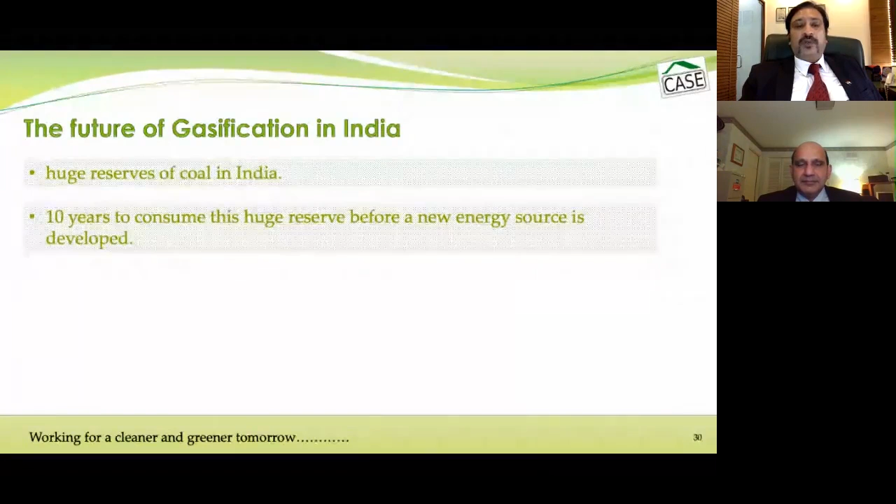That needs to be explored. Coal gasification, we feel, is the only clean and proven way to move forward in this direction. Energy demand and commodity consumption worldwide are on the rise.

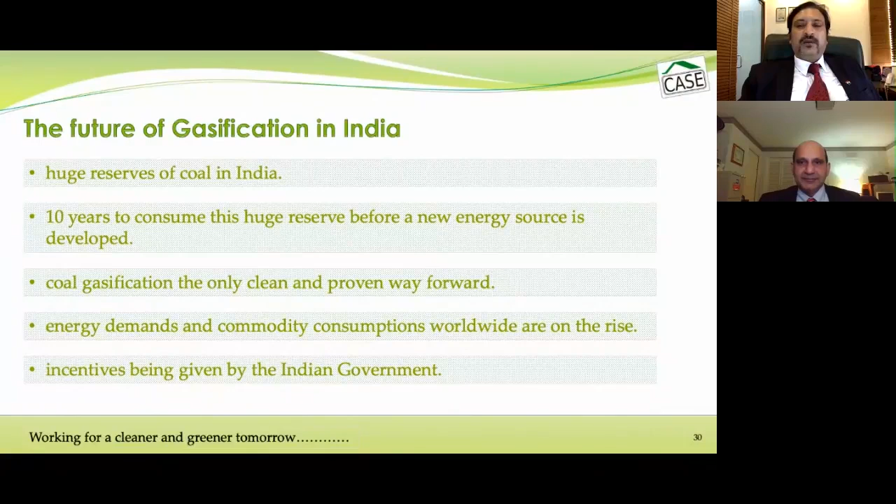Incentives are being given by the Indian government, such as a 20% rebate. I was listening to the technical director yesterday in his presentation, and he informed us there is a 20% revenue sharing rebate offered for the gasification process. If you're using coal for gasification, 20% of the revenue sharing will be given to the end user or to the agents supplying these gasifiers. So this is one very big boost for the gasification sector.

There's a new slide which I introduced. It's very interesting. We are talking about gasifying 100 million tons of coal in the next 10 years.

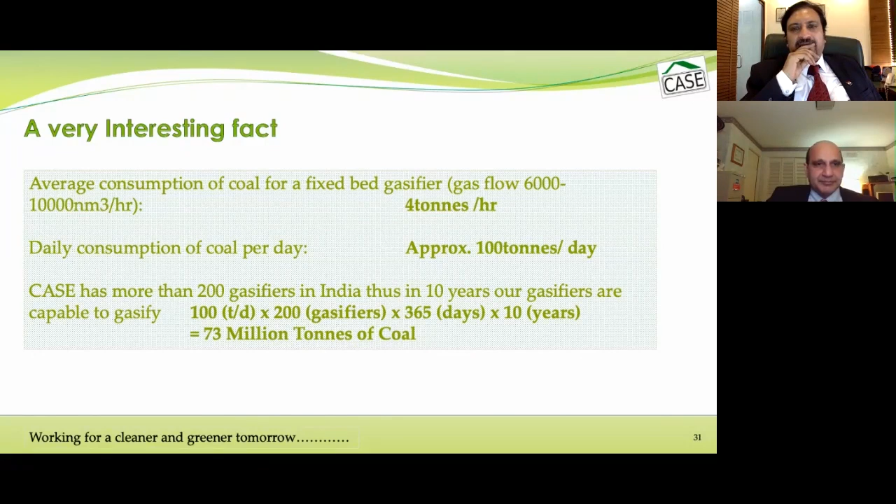I would like to share that CASE has roughly around 200 gasifiers in India, which are being used for thermal application in industry. I've calculated that a normal gasifier, depending on coal quality, would generate between 6,000 to 10,000 meter cube of gas per hour. For that we would require something like 4 tons per hour, so daily consumption of coal would be approximately 100 tons per day.

So CASE, as I told you, we have 200 gasifiers. If we are consuming 100 tons per day for 200 gasifiers over 365 days for 10 years, then we are already consuming 73 million tons of coal for the thermal application of coal gas. So I don't think using another 27 million tons of coal would be a great challenge for India.

I think the standards should be raised. Probably we should talk about 200 or maybe 300 million tons in the next 10 years.

So where is gasification going to stay? Yes, definitely gasification is going to stay. This is the future, and I feel the summit would also stay. Good luck from my side, and see you again soon. Thank you.

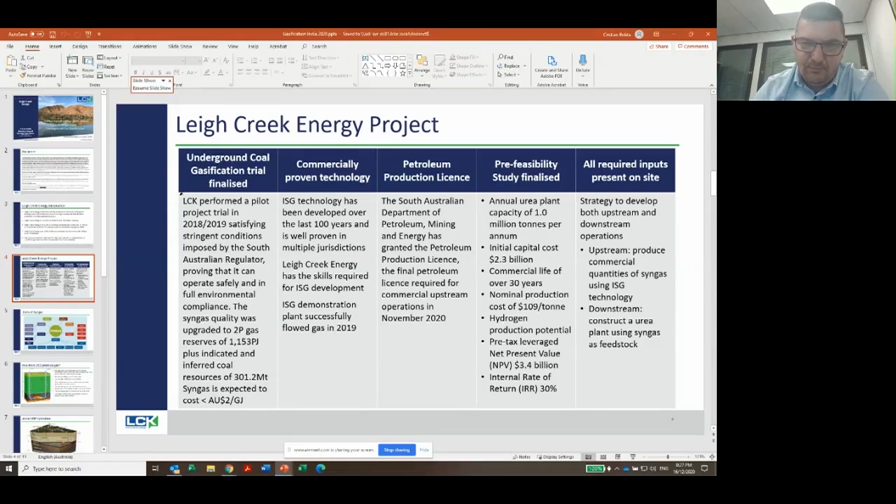Let me go to the next slide. So basically, this is exactly what Air Products and my predecessor from Case put in. These are all the products that can be done from syngas. I'll not go into detail—you guys know the same as us what can be done.

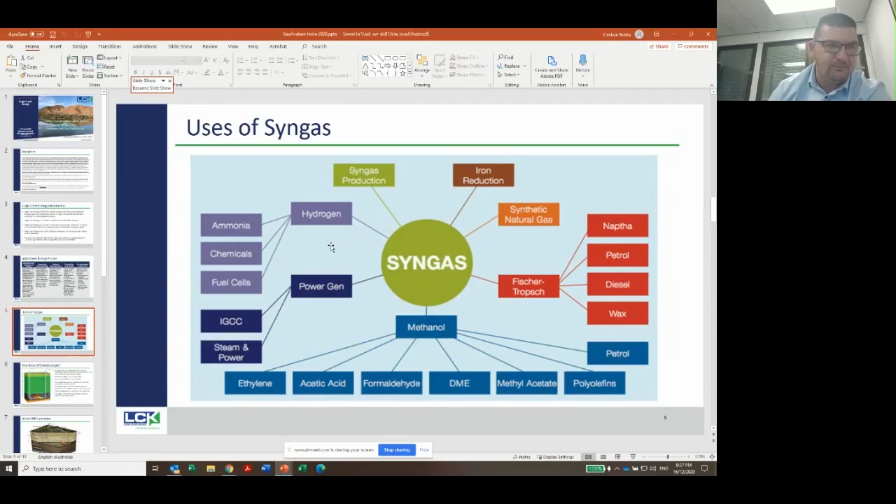How does UCG produce gas? The beauty of underground coal gasification compared to above ground coal gasification is you don't depend on mining.

You don't disturb the surface, don't have to remove overburden, dig out, or invest heavily in mining equipment. For us it's directional drilling, meeting the wells in the ground, igniting the coal, then injecting an oxidant. We progress underground coal gasification using air, which reduces water consumption, and we don't need air separation units, which are big energy consumers in the facilities.

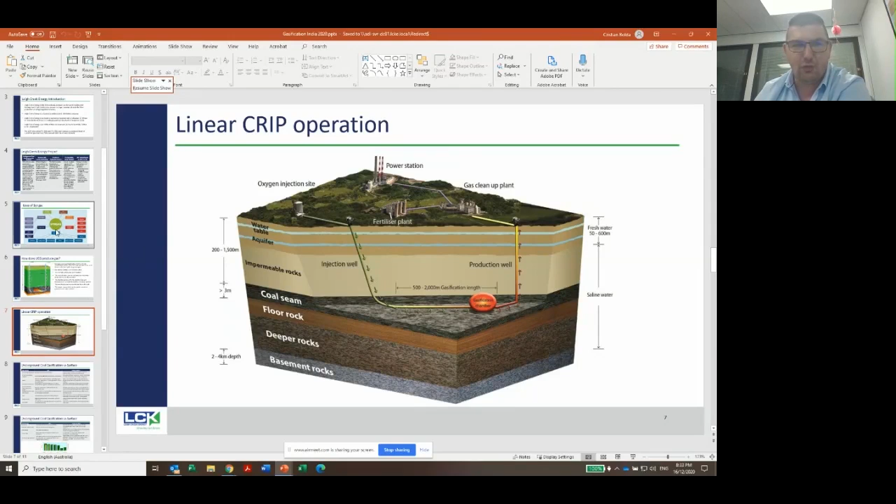Now with underground coal gasification versus surface coal gasification, as I've told you, we cannot directly compare, but there are pluses and minuses. For above ground, you can see the comparison on coal mining and transport, which we don't require in UCG, whereas surface gasification requires a minimum quantity to maintain it. Regarding ground disturbance, for drilling the wells we need a 15 by 15 meter area for the drilling pads and rig, and after that everything is reinstated to normal.

Safety: we are not putting people in the gasifier, and from an engineering perspective, we have all the technology to prevent overpressurizing or any incident. So nobody is at risk during the operation of the plants for underground coal gasification. Reaction time is pretty much minutes for us, because as soon as you stop the air injection and stop the compressor, the coal doesn't have any oxidant, so it turns off.

Cost: we are less expensive compared with surface gasification. On the capex side, we don't need the feedstock. Our cost is basically drilling the holes and putting in the compressors. We don't need an air separation unit because the gas is coming up, and in the cleanup process we will remove the nitrogen cryogenically, which will be fed into the ammonia plants, and the CO2 will be captured and fed into the urea plant.

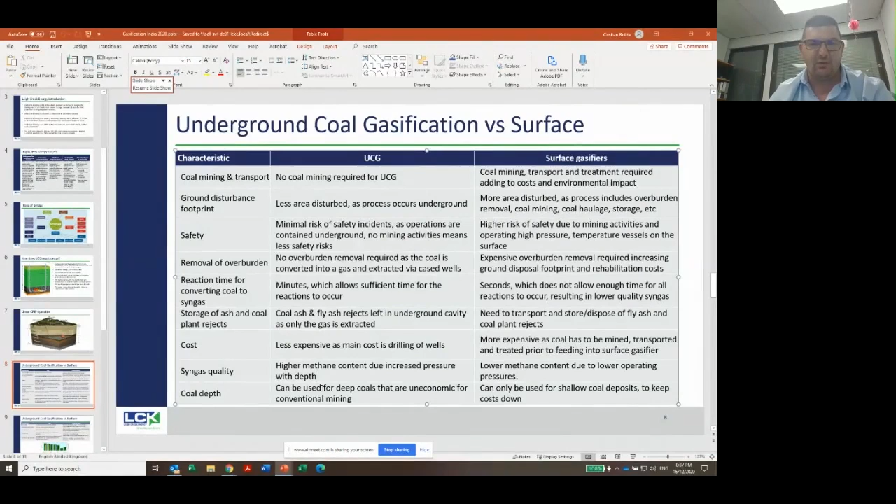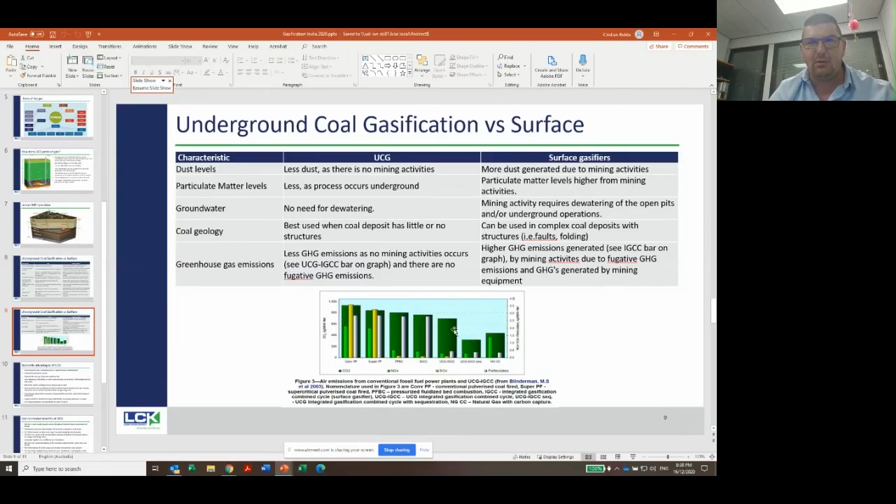Coal geology is best used when the coal deposit has little or no structure, which is why the mining approach is different. On greenhouse emissions - this is the interesting part - this was a study done by Blinderman, referenced by the gentleman from case, showing the CO2 emissions, NOx and SOx. The SOx is pretty much non-existent, comparing with other technologies and what has been done to date.

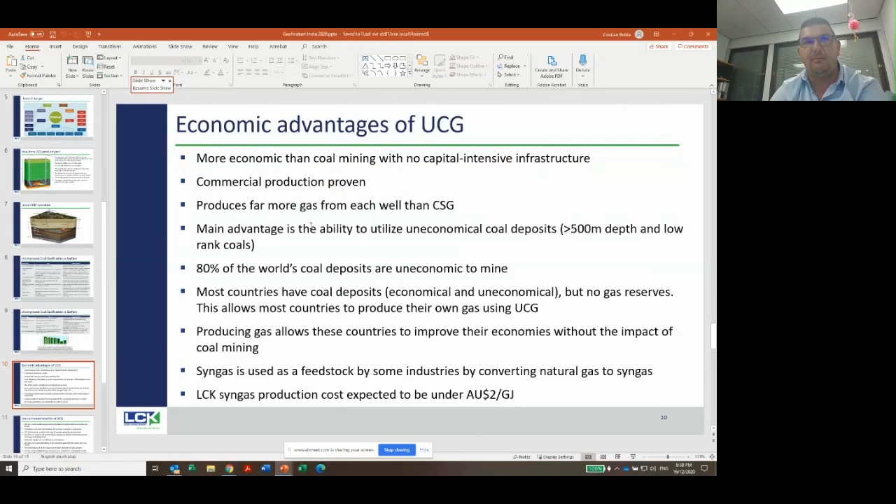Economic advantage: it is more economic than coal mining, with no capital intensive infrastructure. Commercial production is proven, producing far more gas than any gas well in the coal seam gas industry. The size of the gasifier can be up to 1.82 kilometers, depending on the rock structure above, but for our gasifier...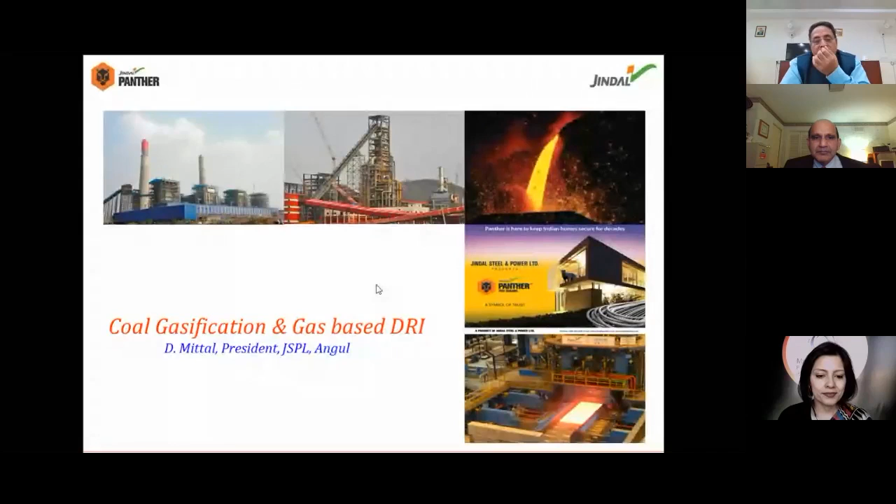Thank you, everyone, good afternoon. I am just going to present coal gasification and gasification-based DRI in our JSPL Angul plant.

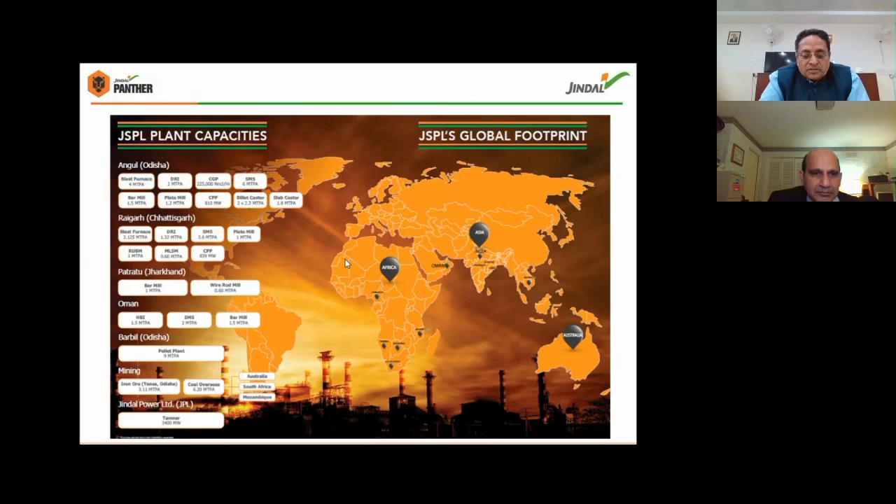This is all about our Jindal group, where we started, and you might know the history of JSPL. We have units in Angul, Raigarh, Patratu, and Oman. We have a pellet plant in Barbil, mining interests in Tensa, and we have JPL, Jindal Power, where we have a 3,400 megawatt power plant. Now let's come to gasification.

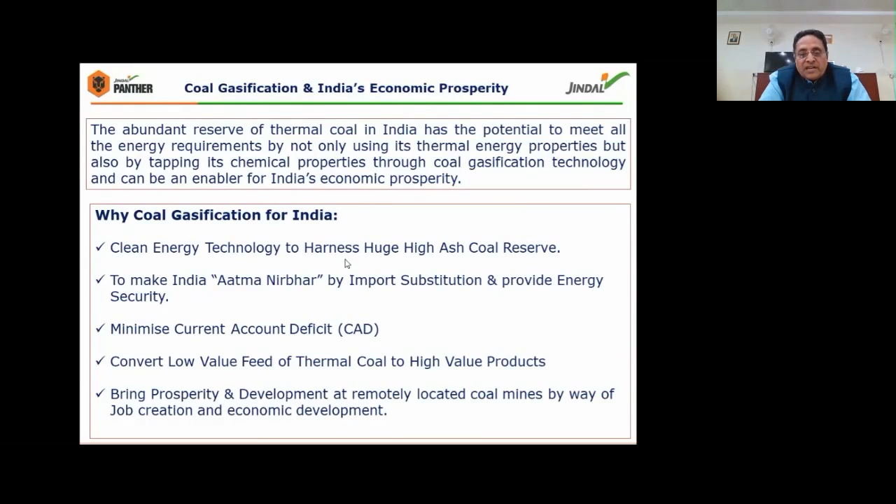Why we want gasification is important for India is because we have huge high-ash coal available, and if we compare the cost of steel through the coal route versus the coking coal route - the blast furnace route - this gasification technology is very important to produce gas through coal. If we use gasifiers to generate syngas and later to produce DRI, this will be a good route, which we have adopted in the Angul plant.

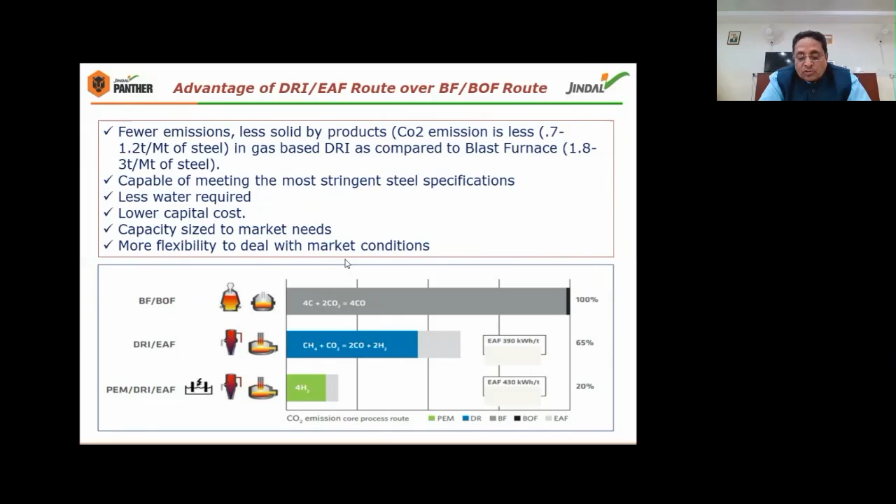If we compare CO2 emissions through all the routes - DRI route versus BF route - you can see there is around 60% more CO2 emission in the BF route. So in future, this DRI route through syngas will be very, very popular in coming days.

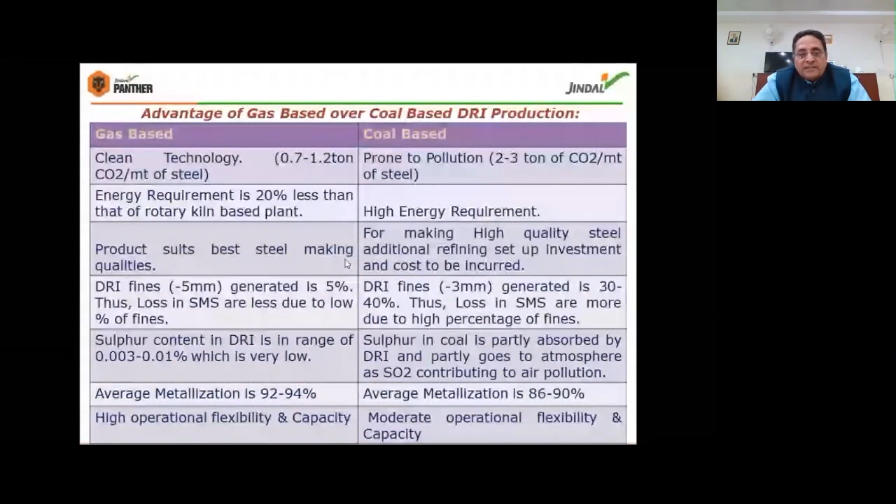There are a lot of coal-based DRI plants in India. If we compare gas-based DRI over coal-based DRI, there are a lot of good reasons to change our technology from coal-based to DRI on gas-based route. Gas-based route has less CO2, energy consumption is very less, and DRI fine generation through the hot route is only 5%, because all the hot DRI generated from the DRI route is fed directly to the arc furnace through hot link.

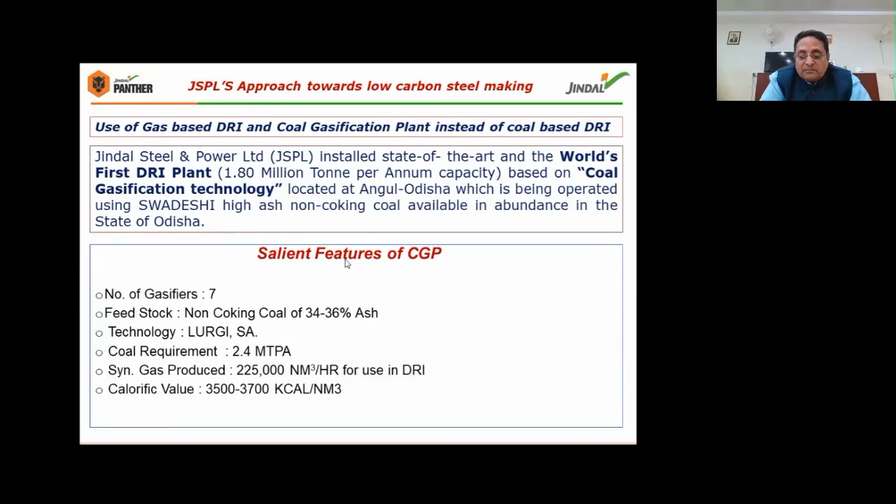But for this time we are using only 60% syngas. The remaining gas we have now designed to use coke oven gas from our blast furnace route. So now, to run the DRI plant at 2 million ton capacity, we need only 1 lakh cubic meter of syngas, and the remaining gas we are replacing from coke oven gas in the existing plant. So we have surplus capacity of gasifiers, and we are thinking to go ahead either for a second unit of DRI, or we may think of putting some methanol or other plants for utilizing the surplus capacity of gasifiers.

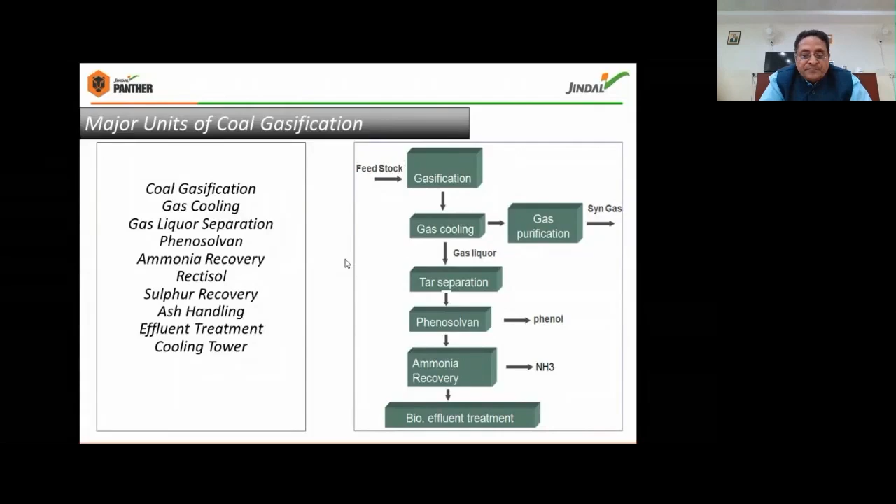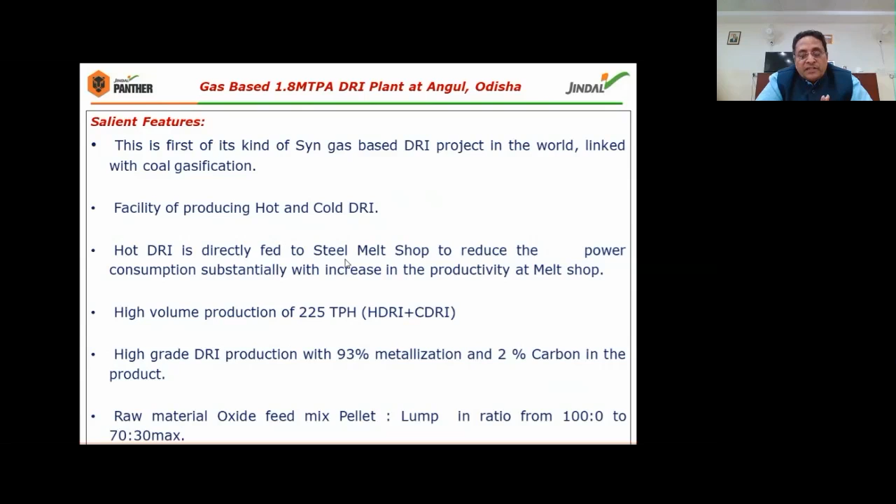If you compare the total plant capabilities, this DRI can produce 2.2 million tons of steel through 1.8 million ton DRI, and the remaining we are using hot metal from our blast furnace. This hot DRI has 700 degree temperature, and this is going to the arc furnace.

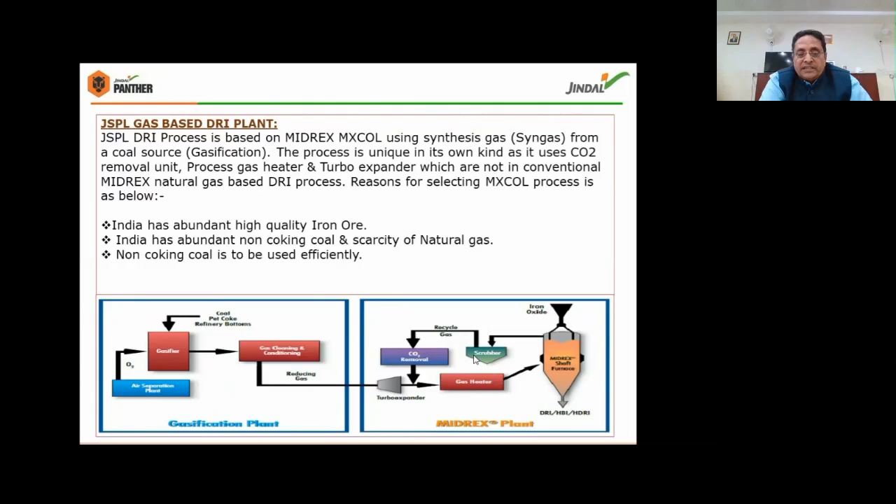After the gasifier, the pressure of the gas is 25 kg, and temperature is normally 40 to 50 degrees centigrade. Then this gas goes to our heater, where we heat it up to 900 degrees centigrade, and this 900 degree gas goes to the Midrex plant. We have one turbo expander, where we reduce the pressure of gas from 25 to 3 kg, because our process requirement for this gas is 3 kg. So we are generating additional power from this turbo expander, because syngas is designed at 25 kg outlet pressure.

This is the scheme of the DRI plant. We are injecting the syngas into the gas heater. Then this goes to the DRI plant where we inject partial oxygen, because this syngas has methane around 10 to 12%. Then in the reduction furnace, hot DRI directly goes to the arc furnace. If suppose there is some problem in the arc furnace, we have another route where we can cool the product in the cooler, and this cold DRI is stored in different bunkers for future use. We can reuse this DRI in the furnace.

This is the flow diagram of the DRI plant, where you can see the red type vertical structure, that is the vertical furnace, where the syngas goes to this Midrex vertical module after heating in the gas heater up to 980 degrees. Then we inject some oxygen to convert the methane, which is around 12%. Then we have two routes: one going to the arc furnace as hot DRI, with temperature around 700 degrees. Suppose there is some problem in the arc furnace, you can switch to cold DRI, where we cool down the product to up to 60 degree temperature, and store it for further use.

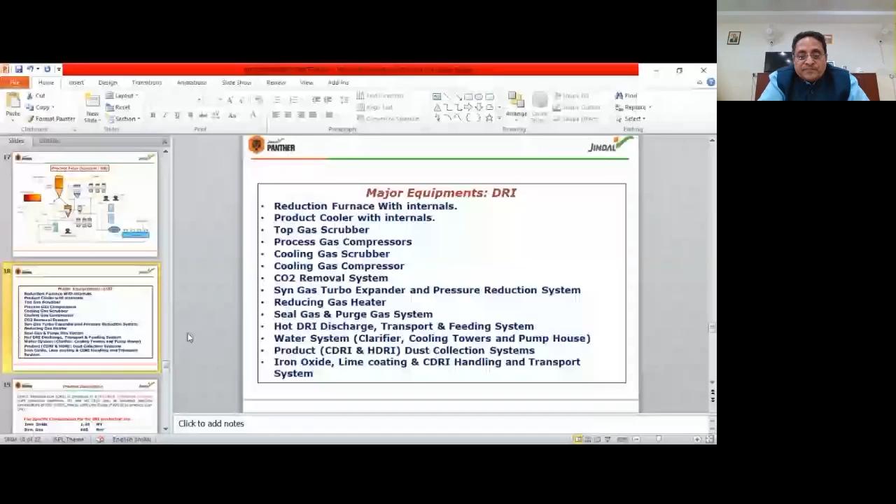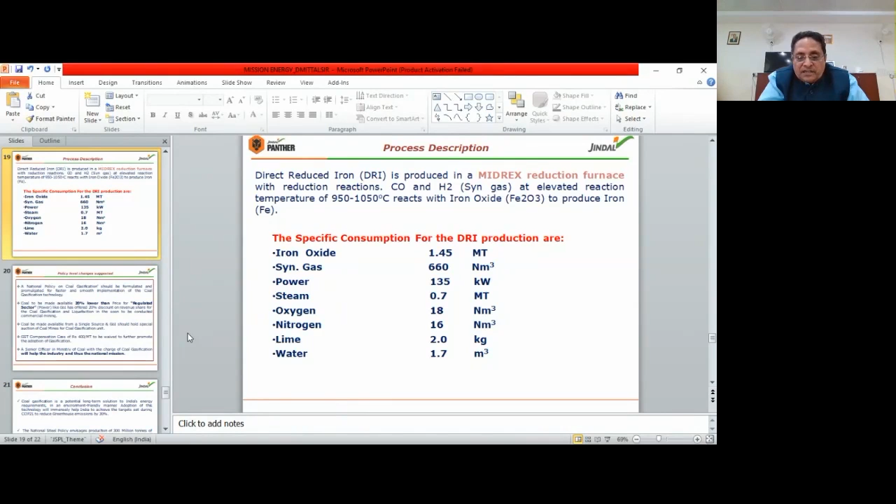But we need to develop such technology, because this is a huge investment we have made in the gasification and DRI plant. We need support from the government so that we can show people this technology is cheaper, and we can promote it so that people are motivated to go for such investment, because it is a huge investment type of plant.

So we need coal to be available from the government of India. Otherwise, nowadays the coking coal price is only $100, and if we compare both routes, the hot metal route is still cheaper than this DRI route. So if we have to go with these gasifiers permanently in India, the coal should be given at a certain lower price, maybe 25 paisa per GCV.

Such kind of policy the government should have. Otherwise, like we just started this gasifier after a long shutdown of 2 to 3 years. Why? Because the coal was much costlier, and there was no viability of running this route.

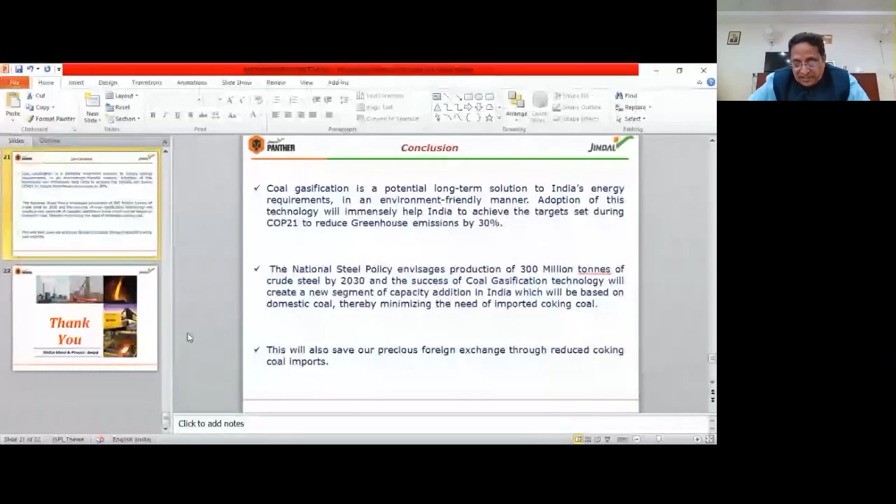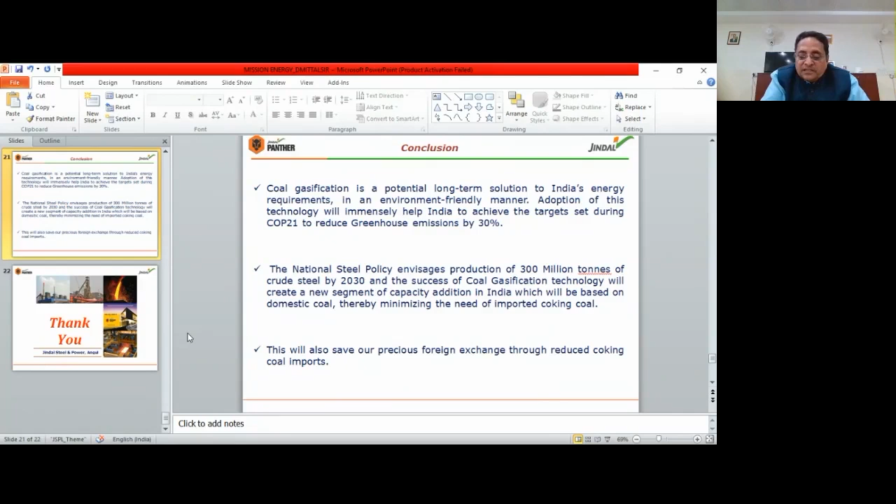And if the government is asking the private sector to invest for 300 million tons of steel, then gasification is a natural process where we can use our own domestic coal and own domestic iron ore, and it will replace the need of imported coking coal. So we should have a composite Indian government policy to promote this route. Thank you very much.

If you have any questions, you can write to us, and we welcome everyone to visit our gasification DRI route to inspect how it is running. Nowadays it is running very well, and we are very happy to say this month we are going to produce the highest DRI through this route since the inception of our plant. Thank you very much.